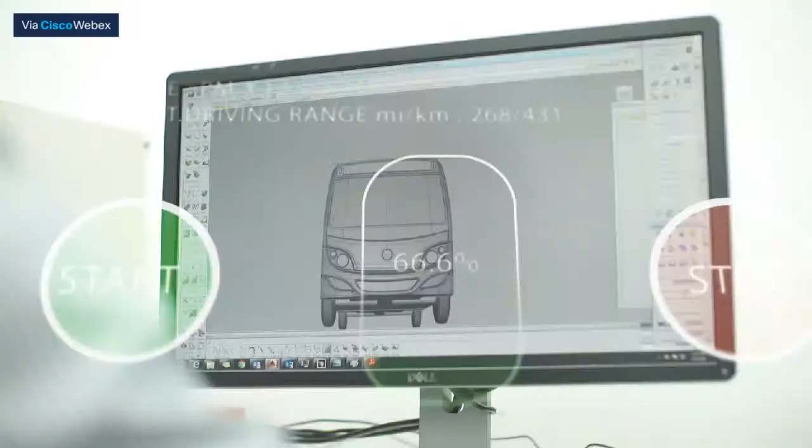We are working towards using cleaner energy sources to drive our vehicles. Our electric vehicle program is set to redefine the future of environment-friendly transportation.

Our greatest test, however, is a matter of national security. We are the largest supplier of logistics vehicles to the Indian Army. Our vehicles perform under the toughest conditions on our national borders.

Our engines not only help safeguard our nation, but also help power businesses. The power solutions we provide are amongst the most reliable in the market.

Our belief in partnership for growth has kept customers' progress at the heart of every solution we provide. To us, partnerships happen on many levels. Our driver training institutes have produced close to 1 million highly skilled drivers across the country.

In the remotest villages of India, we have revolutionized the way children are being educated. Through key collaborations and innovative teaching methods, we are empowering the children of our villages.

To us, mobility is more than just the business we are in. In our world, it signifies progress. It means enabling success to our customers, enhancing their lives. Mobility for us is everything in life.

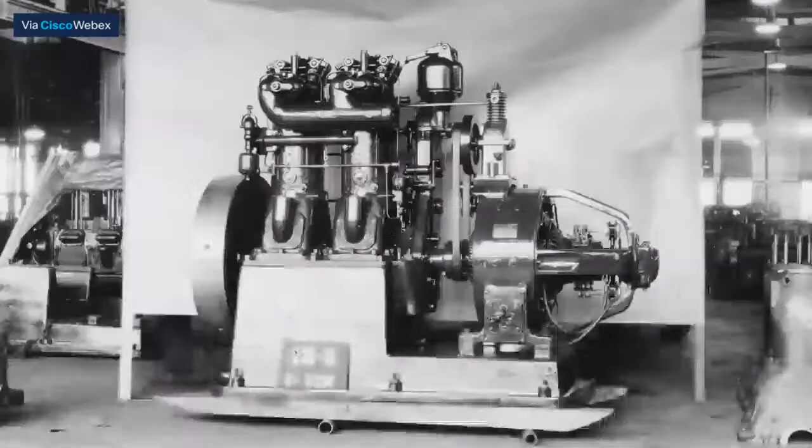We are Cummins. We create the power solutions people depend on. It's what we've done for more than 100 years. Sure, all that history makes us proud, but the future pulls us forward.

However good we are today, we know the best is yet to come. Our business is endlessly shaped by our customers. What they need defines us. And what they say makes us stronger. Who are they? Everybody.

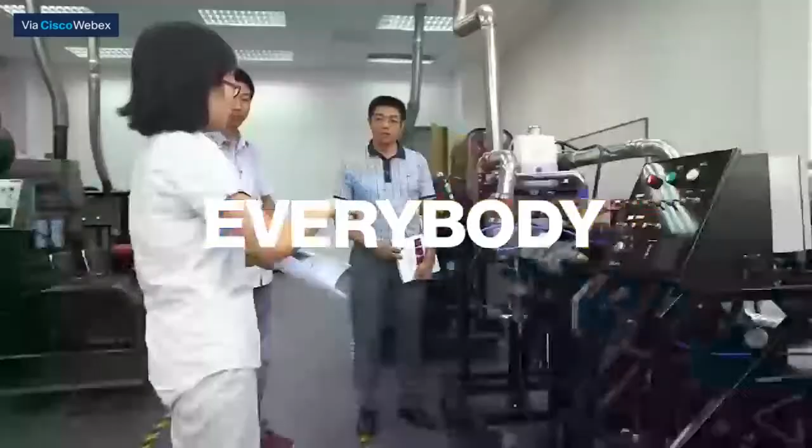But whether their challenges are personal or global, we do everything in our power to solve them. Because no matter where you're headed, we've got your back. And we're with you all the way.

And we never forget how our actions impact the people and the world around us. So whenever there are choices, we make sure we do the right thing.

This is what we do to power a more prosperous world. And that is never going to change. That's why we're always trusted, always innovating, always customer-driven, always responsible. For a world that's always on.

Welcome to the world of Tata Steel. A flagship company of the global business conglomerate, the Tata Group. Tata Steel is one of the world's most geographically diversified steel producers, with operations and commercial presence across the world.

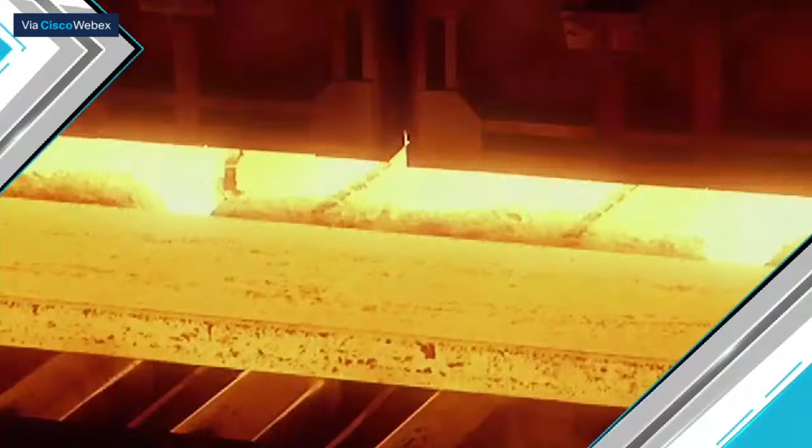The story began with the dream of one man, Jamsetji Nusserwanji Tata, a pioneer, a visionary, a man ahead of his times. He had his heart set on building a steel plant in India that would compare with the best globally.

His dream was brought to fruition by his son, Dorabji Tata, and thus was born Tata Iron and Steel in Jamshedpur in 1907. At the turn of the 21st century, fueled by its global aspirations, Tata Steel expanded its footprint

to Southeast Asia in Singapore and Thailand. Acquisition of Corus in Europe in 2007 placed it amongst the top global steel companies in the world.

In 2015, Tata Steel set up a state-of-the-art integrated steel plant at Kalinganagar, Odisha in India. The Phase 2 expansion of the Kalinganagar steel plant from 3 million TPA to 8 million TPA is currently underway.

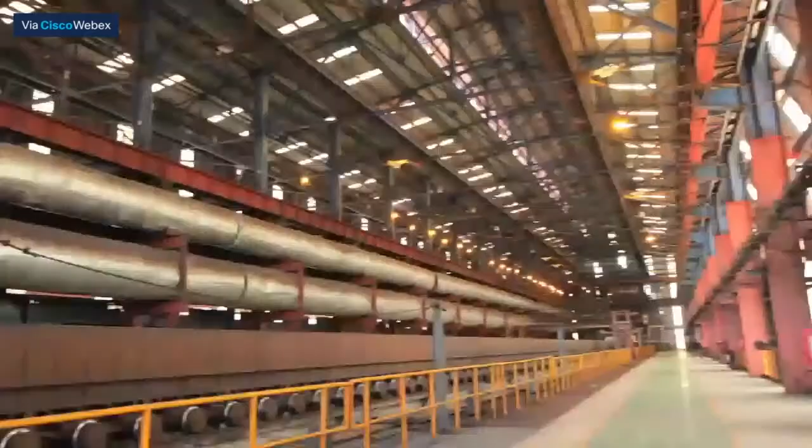The company is all set to pursue domestic growth with its acquisition of Bhushan Steel Limited and the steel business of Usha Martin. This forms part of the overall strategy to increase its India footprint, build capacity in long products, and enrich the product portfolio.

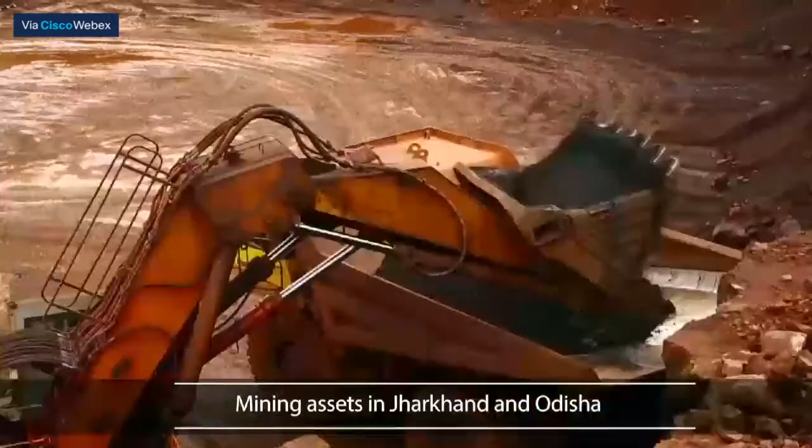Besides steel manufacturing facilities, the company has mining assets in the state of Jharkhand and Odisha in India. Tata Steel has evolved into a leading steel manufacturer, catering to diverse market segments.

In its trend-setting journey, spanning more than a century, Tata Steel has contributed immensely towards the well-being of the planet and people. Guided by its vision to be the global steel industry benchmark for value creation and corporate citizenship, Tata Steel is poised to lead the future.

At Bharat Forge Limited, we don't believe in pause buttons. 50 years ago, we hit play, and we haven't stopped since. We move, we go places, and we take our legacy with us.

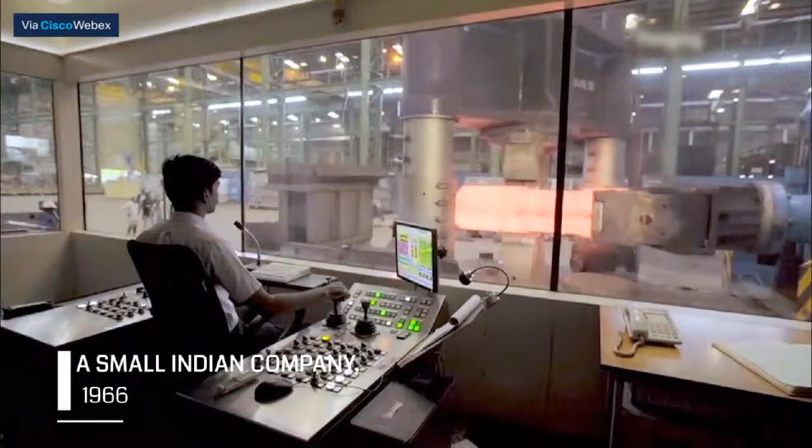We started small, but our dreams were big. And we chased them tirelessly with all our heart. That's what brought us to the top.

To the world's biggest names, and to people's lives. We're committed to partnering greatness, no matter where we go. From India to Germany, to France to Sweden, and now USA. We always go that extra mile and bring the best to wherever our clients are, and we never settle.

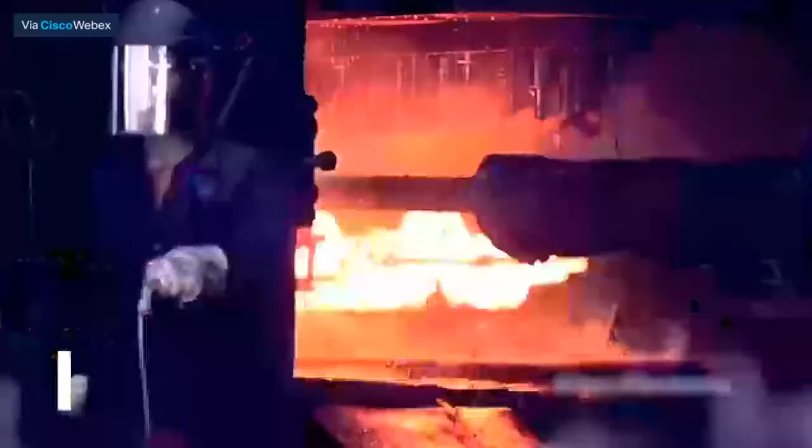Over 50 years, we have pioneered innovations across fields. Our expertise keeps sharpening. Our credits keep increasing, and our relationships, they only keep growing.

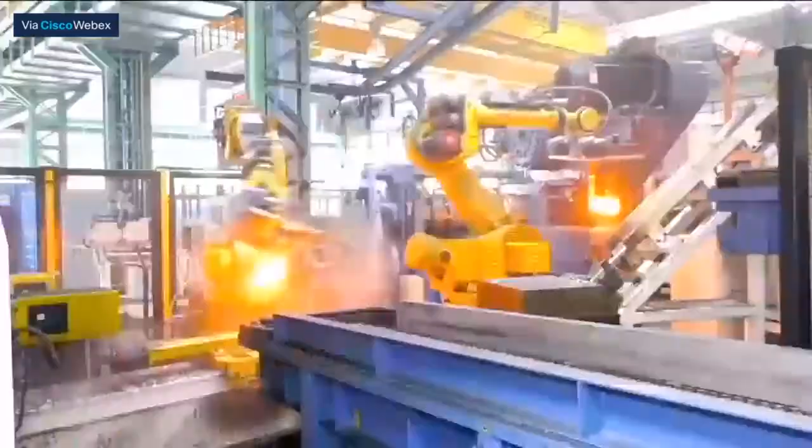We are fueled by our dreams, inspired by the next possibility. We nurture ideas, give them wings, make them soar. We seek to build a better, smarter, and brighter tomorrow. And we will, because that's just who we are: driven, caring, innovative, and unstoppable.

At Ashok Leyland, we've been in the business of mobility for close to 70 years. We are part of the Hinduja Group, a transnational conglomerate spread over 100 countries and 6 continents, with diversified business holdings across 10 verticals.

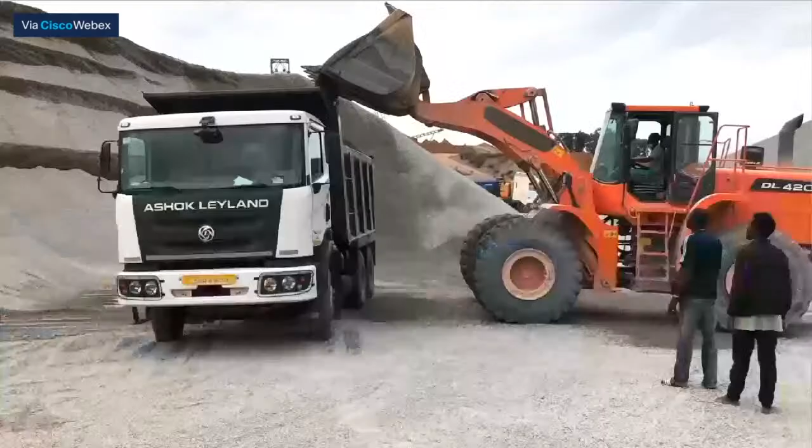Today, we are the second largest manufacturer of commercial vehicles in India. We are the third largest manufacturer of buses worldwide. We are present in more than 50 countries, besides being market leaders for buses in Sri Lanka and Bangladesh. We have a significant presence in the countries of the Gulf Cooperation Council and Africa, dominating in the bus and truck segments.

Our products reach out to over 70 million people. Yet every day, we strive to find new ways of enhancing the lives of the people around us.

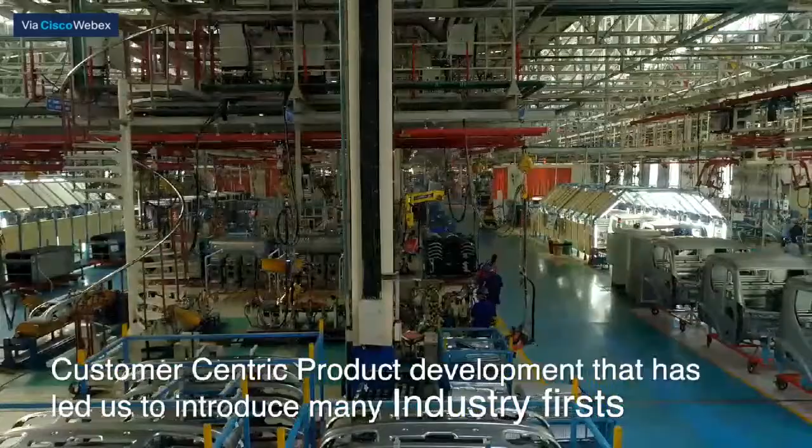We're constantly innovating for the future, helping redefine mobility, designing better products, and finding better ways to produce them. Our products are defined by their practicality and functionality. Every customer solution we provide is driven by thoughtful innovation.

With the introduction of BS6, Ashok Leyland has taken the proven IEGR technology up a notch to introduce the iGen 6 engine technology, which enhances engine performance and durability further. With lower diesel exhaust fluid (DEF) consumption and compact design, iGen 6 lowers the cost of operation, offers better fuel efficiency and low maintenance. The unique mid-NOx strategy ensures overall lower cost of ownership.

AVTR is a revolutionary, industry-first modular truck platform from Ashok Leyland that is powered by the iGen 6 technology. AVTR's incredibly diverse range of options lets you customize your truck based on your load, terrain, and application requirements, spread across the entire range from 18.5 to 55 tons. The AVTR range of trucks comes with multiple options of axle configuration, loading spans, cabins, suspension, and drivetrains on a single platform that offers you a whole new trucking experience.

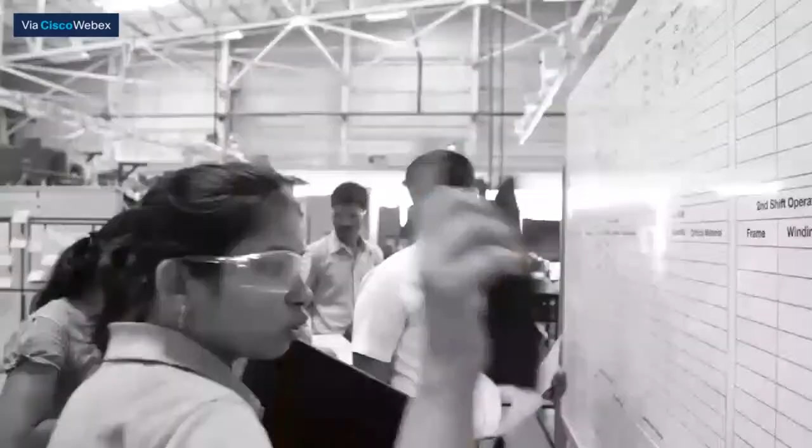Our business is endlessly shaped by our customers. What they need defines us, and what they say makes us stronger. Who are they? Everybody. But whether the challenges are personal or global, we do everything in our power to solve them. Because no matter where you're headed, we've got your back, and we're with you all the way.

And we never forget how our actions impact the people and the world around us. So whenever there are choices, we make sure we do the right thing. This is what we do to power a more prosperous world, and that is never going to change. That's why we're always trusted, always innovating, always customer-driven, always responsible, for a world that's always on.

Welcome to the world of Tata Steel, a flagship company of the global business conglomerate, the Tata Group. Tata Steel is one of the world's most geographically diversified steel producers, with operations and commercial presence across the world.

The story began with the dream of one man, Jamsetji Nusserwanji Tata, a pioneer, a visionary, a man ahead of his times. He had his heart set on building a steel plant in India that would compare with the best globally. His dream was brought to fruition by his son, Dorabji Tata, and thus was born Tata Iron and Steel in Jamshedpur in 1907. At the turn of the 21st century, fueled by its global aspirations, Tata Steel expanded its footprint

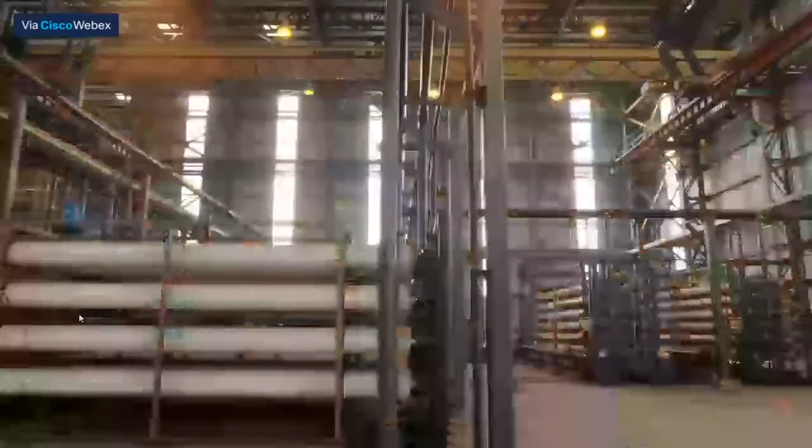The company is all set to pursue domestic growth with its acquisition of Bhushan Steel Limited and the steel business of Usha Martin. This forms part of the overall strategy to increase its India footprint, build capacity in long products, and enrich the product portfolio. Besides steel manufacturing facilities, the company has mining assets in the state of Jharkhand and Odisha in India.

Tata Steel has evolved into a leading steel manufacturer, catering to diverse market segments. In its trend-setting journey, spanning more than a century, Tata Steel has contributed immensely towards the well-being of the planet and people. Guided by its vision to be the global steel industry benchmark for value creation and corporate citizenship, Tata Steel is poised to lead the future.

At Bharat Forge Limited, we don't believe in pause buttons. 50 years ago, we hit play, and we haven't stopped since. We move, we go places, and we take our legacy with us.

We started small, but our dreams were big. And we chased them tirelessly with all our heart. That's what brought us to the top, to the world's biggest names, and to people's lives. We're committed to partnering greatness, no matter where we go.

We are fueled by our dreams, inspired by the next possibility. We nurture ideas, give them wings, make them soar. We seek to build a better, smarter, and brighter tomorrow, and we will. Because that's just who we are: driven, caring, innovative, and unstoppable.

At Ashok Leyland, we've been in the business of mobility for close to 70 years. We are a part of the Hinduja Group, a transnational conglomerate spread over 100 countries and 6 continents, with diversified business holdings across 10 verticals.

Today, we are the second largest manufacturer of commercial vehicles in India. We are the third largest manufacturer of buses worldwide. We are present in more than 50 countries, besides being market leaders for buses in Sri Lanka and Bangladesh. We have a significant presence in the countries of the Gulf Cooperation Council and Africa, dominating in the bus and truck segments.

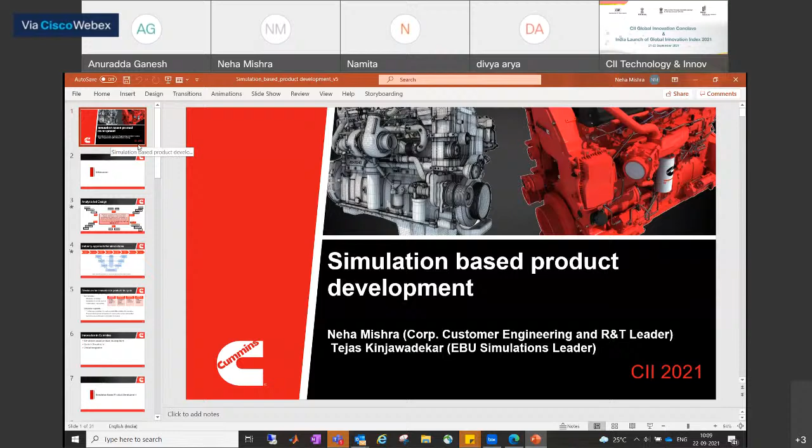With this, over to Neha and Tejas. Neha, I understand you're going to start first. Over to you, I really know that the audience are going to enjoy the talk. Thank you so much, over to you Neha. Kind words, thank you. Just to save the bandwidth, I'll be switching off my video. I've got some unstable internet, so just a disclaimer in the beginning. Neha, you'll need to speak a little slowly. Sure. Thank you. Please, someone can confirm if my screen is visible to all. Yes, yes it is, yes.

Good morning everyone. It's our extreme pleasure and we feel honored to actually deliver a talk on simulation-based product development. We would be talking about the journey which Cummins has taken from an analysis-led design towards a simulation-based product development, an innovative and creative approach so that we can save money, time, cost, and actually lead to products which are going to be not only performance-wise optimized, but also robust for the market.

So with that, I'll start with an introduction of the topic. What do we actually mean by analysis-led design or modeling and simulation in general? What you see on the screen is essentially a wiki definition of modeling and simulation. I'll read it for you. Modeling and simulation is the use of models - physical, mathematical, or otherwise logical representation of a system, entity, phenomenon, or process - as a basis for simulations, methods for implementing a model, either statically or over time, to develop data as a base for managerial or technical decision making.

I know it's a very complex jargon of words put together by Wiki, but it wanted to make it really very holistic to define what modeling and simulation is. If you look at it more carefully, it encompasses everything under the sun when it comes to taking decisions in product development. So when we look at modeling and simulation, there are typical questions which come to any kind of concept being introduced - the 5 W's and 1 H.

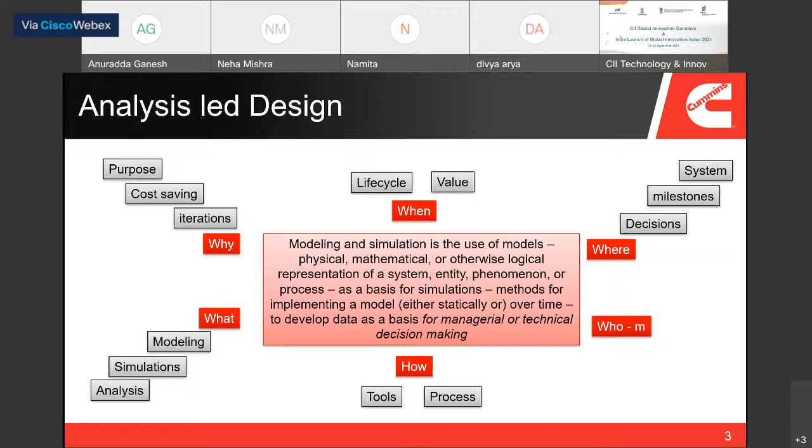If I look at it from an on-highway application of vehicles, you do a summer trial, you do a cold trial, you are looking at different altitudes, then there are many milestones. Can I do simulations much ahead in time so that you are ready for those kinds of actual testing?

And finally, who are the doers? Mostly the engineers who are aware of those tools and processes, and the stakeholders. Again, there is a trend which is coming in, and that's what Cummins is encouraging: the people who are going to use the data should be running these simulations. How can we make these tools more and more user-friendly and effective?

We need to gain confidence of our stakeholders at how close it is from the real time. And finally, in the product development cycle, it should also enable independent verification and validation. So this is, in a nutshell, mostly around modeling and simulation.

What is the industry approach for simulation? Any software or requirement change triggers a unit testing. You start implementing that requirement. Once you have implemented it, you start trying to test it in a model-in-loop simulation.

Eventually, you take it to a processor-in-loop simulation, trying to evaluate whether in the realistic scenario we are going to have impact on the time responses. Is it having enough memory, and so on and so forth? It leads to hardware-in-loop simulations. Then it goes to vehicle testing, certification, and eventually the life cycle assessment.

So if I look at it from the entire product life cycle, from the concept or the requirements all the way to the sustainability of that component or product into the field, system simulation has a role to play everywhere. So what you now see on screen is essentially the V diagram of modeling and simulation.

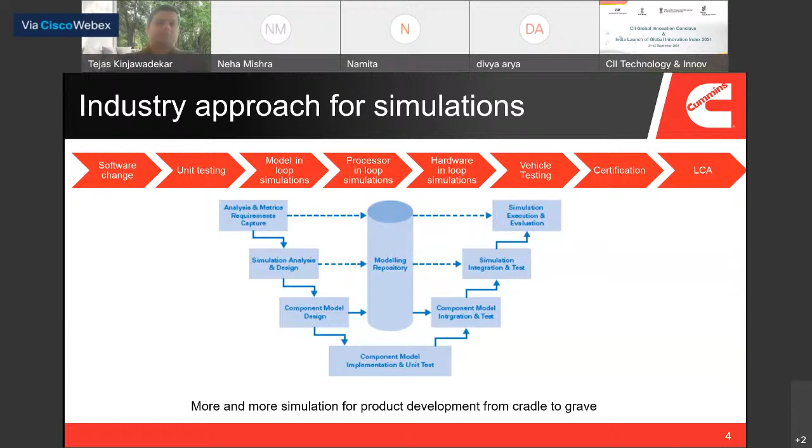So these model repositories become a kind of big database from where we can take decisions fairly quickly without waiting for a duplication of the issue onto the vehicle. So that's the approach today: more and more simulation for product development, from cradle to grave.

And that's the journey which Cummins is taking today, from an analysis-led design, to simulation for innovation in the product life cycle. Simulations essentially enable a lot of innovation right in the technology exploration area, when you're evaluating concepts, when you do not have the liberty to actually cut metal, because you're trying to make sure whether this concept is going to add value and be a feasible product by the end of the day. So that's the time simulation plays a key role in the technology exploration phase of a product life cycle.

You actually go into product innovation when the new product is getting developed. So you have evaluated a concept, you have fairly great confidence on that concept, and now you're trying to build the actual product. And that's where a lot of innovation comes in when you're trying to optimize the performance. You may not be able to do it if you're doing hardware iterations.

All the iterations, all the combinations can be taken care of in the simulation environment. And another concept coming up in the industry nowadays is that we don't only need performance which is optimal, we are also looking for a robust performance.

If you look at it from an on-highway application, the truck which is going to be bought in India is not going to be restricted to one location. It's going to go from high altitudes in Leh Ladakh all the way to sea level in Chennai, and it needs to take care of all the variations in environment and usage factor. So to ensure our products are robust for all these conditions, we obviously cannot test them all, but we can simulate those situations and give them a robust product.

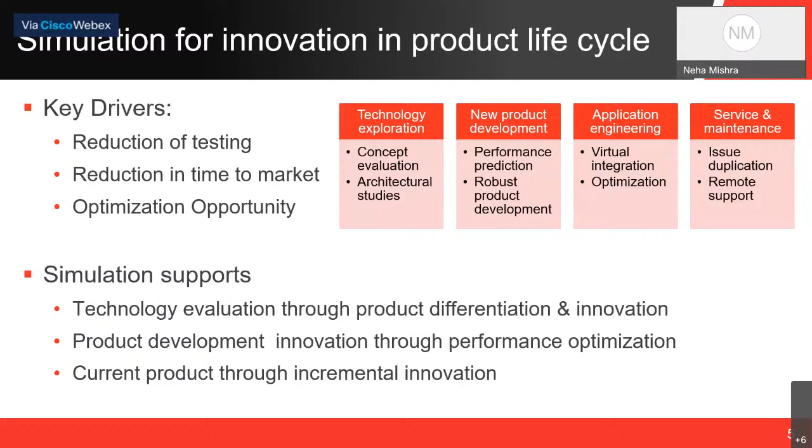So in a nutshell, what I'm trying to say is: technology evaluation through product differentiation innovation at the beginning of the product life cycle, product development, optimization of performance and robustness, and definitely incremental innovation through current product support.

This is how we have structured today's discussion. We are trying to talk about innovation in Cummins through ALD, through modeling and simulation, through simulation-based product development. So Tejas, my colleague, is going to talk about the approach or process we have started adopting in Cummins, which we are calling simulation-based product development.

Post the introduction of the concept, I'll talk about system simulations, how we actually optimize component performance to ensure the end customer's requirements are being met. And finally, Tejas will come back and talk about virtual integration, how we integrate our components and products into the end application virtually to make sure the product is robust and performing optimally. So with that, I'll ask Tejas to take over a few slides.

Sure, thank you Neha. Thanks for the introduction, and good morning everyone. So Neha gave us a good background of where simulations fit into the different stages of product development. What I'll focus on next is this initiative that we currently have, which is a big part of engineering focus right now in Cummins, called simulations-based product development.

So I'll start off with what exactly is simulations-based product development, or SBPD, and what makes it different from what we have been doing in the analysis-led design space. Like many companies, Cummins has also been doing analysis-led design for a couple of decades now. A lot of the focus in analysis-led design was at the component level, so that we analyze designs through FEA methods and CFD simulations, to have confidence in the design before we build prototypes or procure hardware for it. That was the focus of analysis-led design.

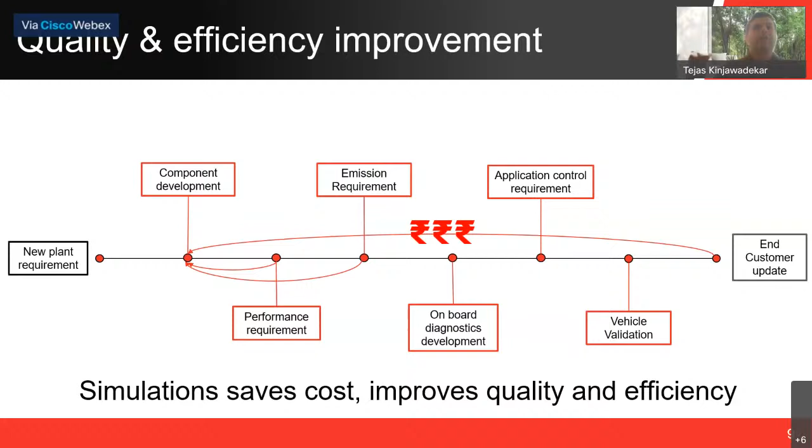If you treat this as a linear process, and something causes rework towards the right of this cycle, the further right you are, the harder and more costly it is to do any rework. What simulations get you is shorter closed loops, where as I'm developing my component, I can assess if my performance requirements are met, if my emissions requirements are met, and if I'm meeting my customer defined requirements while developing the component. So it helps save cost and deliver a better quality product more efficiently.

Going back to my earlier comment on culture change, typically you look at simulations with two lenses. One is the lens of accuracy: if I have a real physical system, how close are my simulations predicting that real system's performance? The second lens, which is not used as effectively, is the repeatability of the tool. With simulations, you get almost perfect repeatability, because it's a mathematical or physics-based model, which if you give the same inputs, should give the same outputs every time. So it's a highly repeatable setup.

So if you look at the different options listed here, starting from field population. I'll pick an on-highway example. So you're testing a truck out in the field, or testing multiple vehicles in the field. There are so many different noise factors that come in. How is the driver driving the truck? What kind of operating conditions are you testing on? What are ambient conditions, traffic, road, all of those things come into play.

So when you pick a data set from your field population, it's tough to figure out whether it's truly representative of your end population, or you're picking up a data set from one of the tail ends of your bell curve. This becomes especially harder when you're trying to assess if whatever improvements you have done, be it a hardware change or a calibration change, those improvements are typically incremental. You'll have multiple features which add up to, let's say, 5%, 10% fuel economy, but the individual features contribute only portions of it. Now if your variation in testing is so high that you cannot resolve those differences, then there's a drive to tighten the variation.

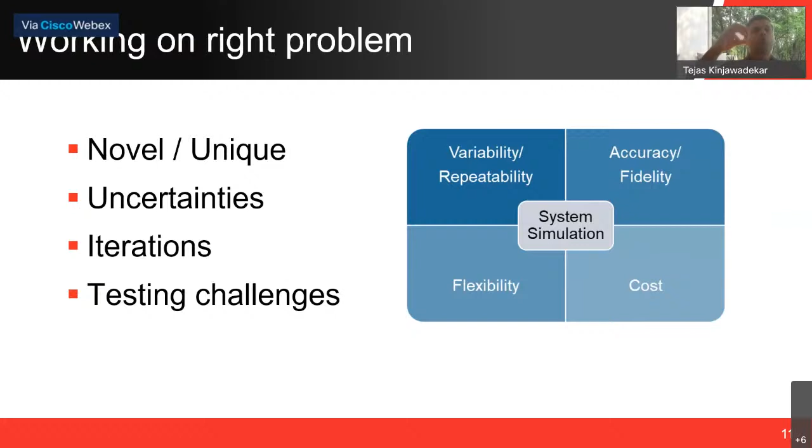So what we'll next go into is this system simulations area, which Neha will cover. Thanks, Tejas. So Tejas did talk about the system simulation-based product development, and that it triggers to a system simulation, because whatever we develop has to go to an end customer who's going to use it. So Cummins develops engines, after-treatments, filtrations, and many other components, which actually go into different applications. And we are looking at an innovative approach of can we simulate those and come up with better products.

So I'll start with two examples. The first one, our favorite, where our engines majority of the time goes in India, is the truck application. So for an on-highway or industrial application, these are the two places where Cummins engines go.

So what do we do the first thing when we are actually putting together an on-highway application? We like to see how the architecture would look like. So if it's a truck application, we are looking at it from a drivetrain perspective, because there's a system level requirement of drivability, of performance, which is going to be driven by fuel economy.

Now, all the on-highway or off-highway applications are driven by emissions. So all of these will guide how I should define and develop my drivetrain so that it meets all of these systemic requirements. And if I need to evaluate what all are the different options, one heuristic way is going and actually building those different drivetrains and comparing and running a field test.

Instead, we now have tools which can actually do these architecture studies, and they are all available tools in the market, like Autonomie, Amesim Hybrid Optimization tool, or Simscape, and so on and so forth. Excavators or all the off-highway applications are even more important for doing these architectural studies, because their hydraulic and pneumatic circuitries also need optimization.

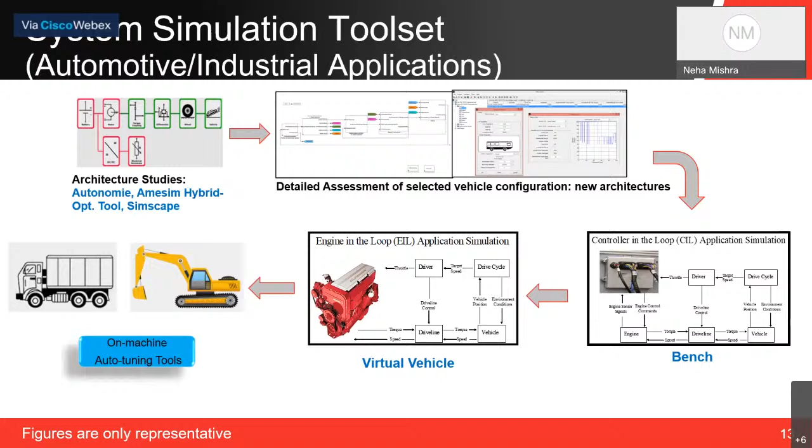Another example of where Cummins engines go in is gensets. So we have something called basic simulation. When you actually start having a controller, what you normally do as testing is have simulated standard inputs given to those controllers, and then you check against the standard outputs which are expected out of it. It's a kind of open loop test which is typically done in a basic simulation heuristically for any genset.

And then once that's done, we normally go to a genset, which is actually hardware, and then optimize the testing. These gensets not only go for - they are in a wide range of applications where they stay. They can be on a local application, a residential application, or they can actually be in your data centers. And all of them will be seeing a different kind of duty cycle.

So every time a genset goes for a specific application, the control engineers also have to go there and actually tune it for that specific application. So that's the kind of work culture that existed earlier.

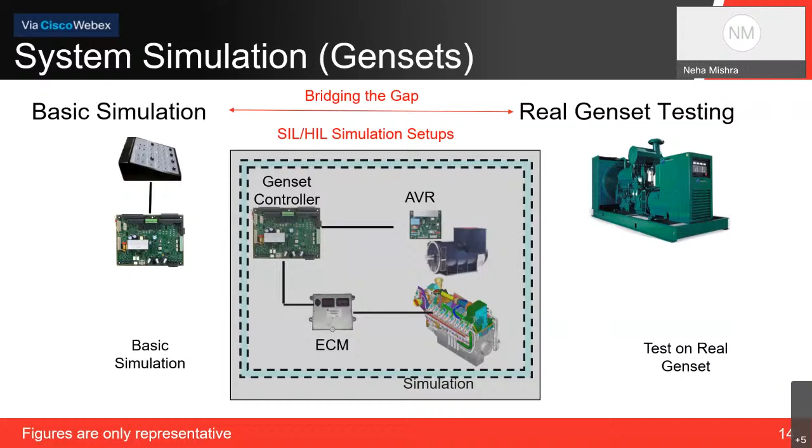So with that, two examples, I would now go a little deeper into what do we mean by system simulation, and how we build together all these components as a system simulation setup.

So if I look at it from Cummins context, what are the different components which we have? We have turbo, we have cylinders, bowl, injectors, catalyst, if it's an after treatment. So all of these become my components. I need to actually create models for these components.

Where are these models being created? In a very historical way, as CFD simulations, FEA domain, or dynamics. So these are the places where all these components are modeled today.

They become a subsystem, because then you have an engine subsystem, which will have an air handling system, a fuel handling system, and all of them put together will actually contribute and make it an engine subsystem. We'll have an after treatment subsystem, controller subsystem, because all of these individual components would be controlled by certain signals, and all of them put together will now become my integrated controller.

And if I look at it in a modeling lens, vehicle dynamics is also a subsystem, because I'm going to integrate my vehicle dynamics or my drivetrains into this entire gamut of things and make it a subsystem.

Now, the moment we start putting together our subsystem models, it has to move out of a finite element domain and become 1D or 0D models. The reason being, it has to run at real time or faster than real time to set up more DOEs around it. So the tools typically used for subsystem modeling are mostly GT Power for engine, AVL Boost, others for after treatment. These are all 0D and 1D models.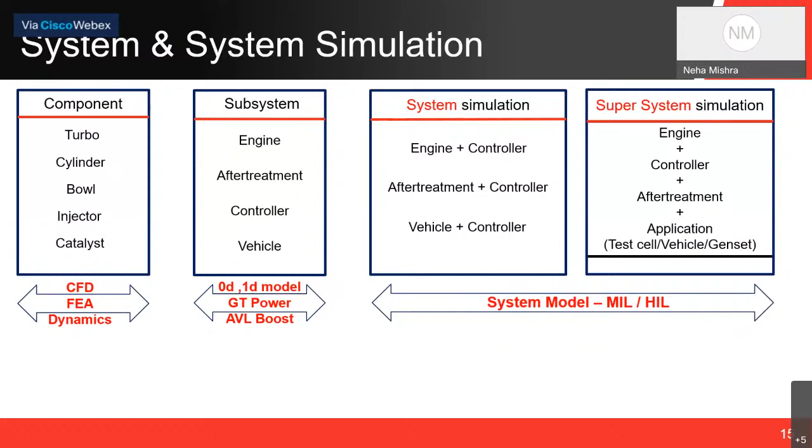And all of these models are typically called model in loop, depending on if it's purely a simulation environment, or hardware in loop, because you start putting some hardware in these loops, mostly from controls side, ECMs, and certain sensors and actuators.

So again, to understand a little more, what is my model development cost when I move from a component to a super system? Why is Cummins actually investing into a super system simulation when there is already component models existing? There is a model development cost, which is lower when you're doing it at a component side, but it starts increasing from a super system size.

But the impact you have from the optimized performance is humongous. The test coverage range, that's where the advantage comes in. If you are looking at a systemic performance, or our stakeholders are looking at systemic performance of emissions and fuel economy, they may not be able to make that out from a component optimization done at a turbo level. The turbo might be optimized, but we do not know the impact of a turbo change all the way up to fuel economy or emissions.

So there is a narrow coverage of test ranges when we start from component, and there's a huge coverage when it comes from a super system level, more relevant to our end customers. Model maturity wise, the component models are more detailed because they are done at a very small scale for a smaller component. As we abstract out the fidelity, it goes from high fidelity to low fidelity at a super system level, because there you're looking at it at system level. It is mostly guided by the computational power it requires and the time it takes for simulations. So this is how we actually quantify our systems and system simulations.

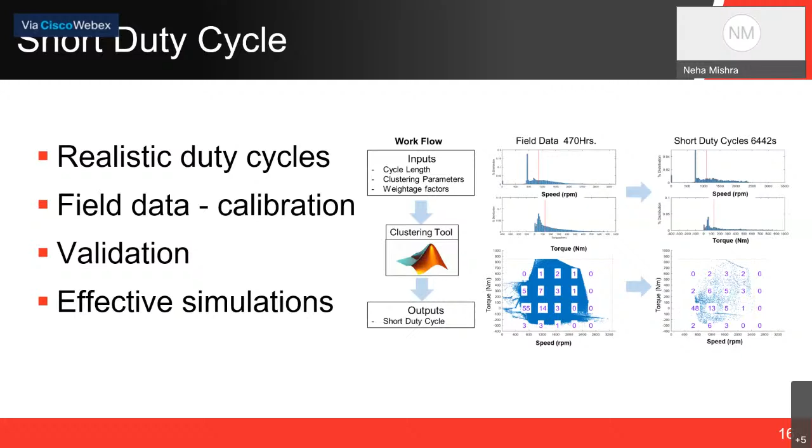You've been hearing us talk a lot about robustness. That's another area becoming more and more popular from our end customers' requirements perspective. They would be looking for an optimized performance engine that takes care of all the variability possible in our country, like I talked earlier, from an altitude point of view or from traffic areas, conditions, and the duty cycles it's subjected to.

The same engine can actually go into a marine application, and it also can go into a genset application. There would be very different requirements when it comes to vibration and noise when the same engine goes into different applications. So how do I actually make it a robust product? We have come up with a norm, not something new from the industry point of view. We have used the same Six Sigma approach, defining what is my key performance indicator. We started looking at the parameter diagram for the unit under test and see what's the desirable and undesirable outcome, and do a one-factor-at-a-time kind of DOE for the control and noise factors.

The reason why we do it is then we identify what are my critical noise factors, what are my sensitive control factors, and then we optimize the control factors and try to see the sensitive noise factors run the worst case scenarios.

Once we have run the worst case scenarios, we understand whether the current state which my product is at can handle the worst case. If yes, then we run Monte Carlo scenarios. If not, then we have to do something to update our models.

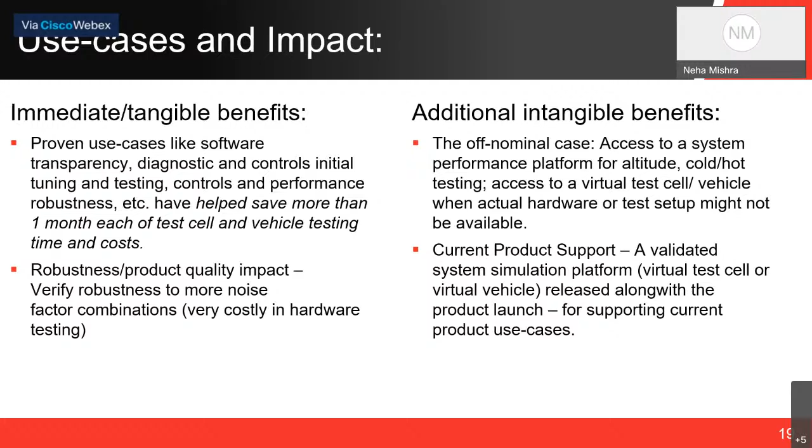And current product support - this is intangible since it's a new concept. A lot of products are already in the field, and there's a cultural shift, as Tejas was talking about. People say it's been working, so why do I need to model it? But when you see something failing, you can come back and make a change using these models more effectively. So that's something we're trying to take note of, use, and eventually show that even current product support is going to have a huge benefit using these methodologies.

Another example - Cummins is also venturing into alternate power solutions, such as electric transit bus evaluation of the drivetrain. So not only are we talking about conventional diesel drivetrains, we're also talking about electrified drivetrains and how we can select simulations for them.

We have very good simulation models of driver behavior, so you can see whether you have an aggressive driver or a calm, composed driver, and so on. We run all of these simulations for powertrain sizing scenarios or route-specific simulations.

This is one of my last slides on the system simulation topic. We are also moving towards realistic simulation. So what next in the modeling and simulation domain? We did the performance, we did the robustness pieces of things, and we are now reaping the benefits of all of these.

But the next thing is there will be more and more advanced control features coming onto vehicles. There are advanced sensors being installed to enable those advanced control features across different applications. Many different vehicle and powertrain systems will come up, along with a lot of safety controllers and safety requirements on applications. So how are we going to integrate all these different types of controllers and simulate them? Realistic simulation becomes a very key thing in the modeling and simulation domain.

That's what we're working on now - trying to integrate our detailed high fidelity models with realistic simulation: simulating traffic situations, traffic congestion, speed limits, vehicle dynamics, road conditions, and all of those factors. If you remember Tejas's plot on variability, we started with pure simulation, then we were able to do a virtual dyno and a virtual vehicle, but the variability of road and traffic congestion wasn't there. Once this capability is developed, we'll again start incorporating those kinds of uncertainties into our simulations.

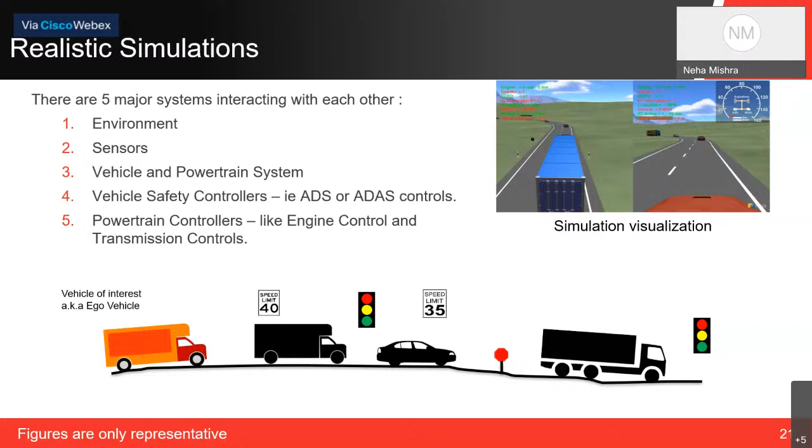So finally, the takeaway from a system simulation perspective: optimal and robust performance is a need. Simulation enables innovation for right-first-time results and reduces time to market. The other thing which leads us to the next topic is virtual integration - once this is done, how well are my components installed onto the end application. Tejas is going to talk us through the virtual integration side.

Thanks, Neha. So we're now heading into the last leg of our presentation today.

Cummins being a power solutions provider, it's very important for us to make the integration in the end application as seamless and efficient as we can, and engage with our OEM partners to deliver a product optimized for their use case or their own customers.

With that thought, there is a team here in India called the Virtual Integration Center, which was developed specifically on how we use simulation capabilities to better integrate Cummins products. It's a multi-domain simulations team focused on machine integration.

What types of analysis we do, we'll cover in the upcoming slides. When we talk about simulations-based product development, there are different strategic elements to it - what kind of tools you use, but also what kind of org structures you need to effectively cater to the simulation requirements.

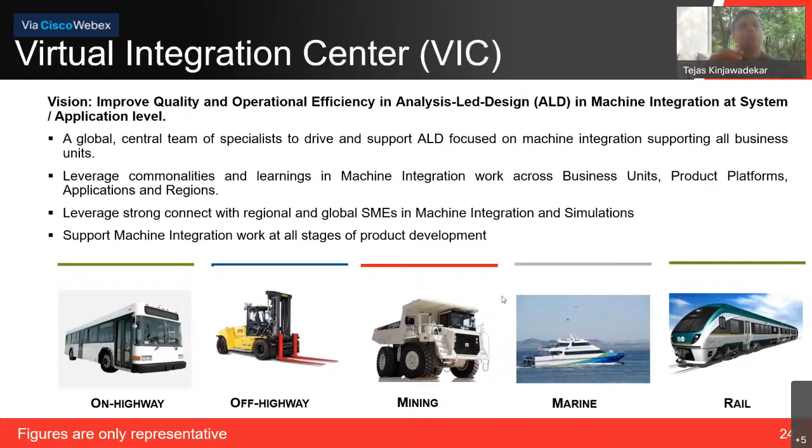Next we'll go into what types of simulations are used. Again, the focus is machine integration - so the Cummins product and how it gets integrated into the end application. We're doing a lot of machine level CFD simulations, or computational fluid dynamic simulations.

A recent focus area has been external aerodynamics, where we predict drag coefficients of vehicles and then make recommendations on how their drag can be reduced, because that directly translates to fuel savings.

Neha talked about advanced controls features. As markets go into platooning type applications, there are trade-offs of the distance between two trucks that impacts the cooling system performance. So how does external aerodynamics interact with cooling systems, and how does that interact with the distance between vehicles? We are developing simulation capabilities to understand all of that.

Another use case is multi-phase simulations, which is typically hard to do. But we have found good use cases - for instance, if we have sensors exposed to the ambient, or protected but still having water ingress that can damage them. We use our simulation tools to predict the potential for water ingress and design to protect against that.

Or going back to cooling system performance, how do you ensure that whatever coolant you're filling gets uniformly distributed in all the cooling channels and jackets so that you end up with effective cooling performance.

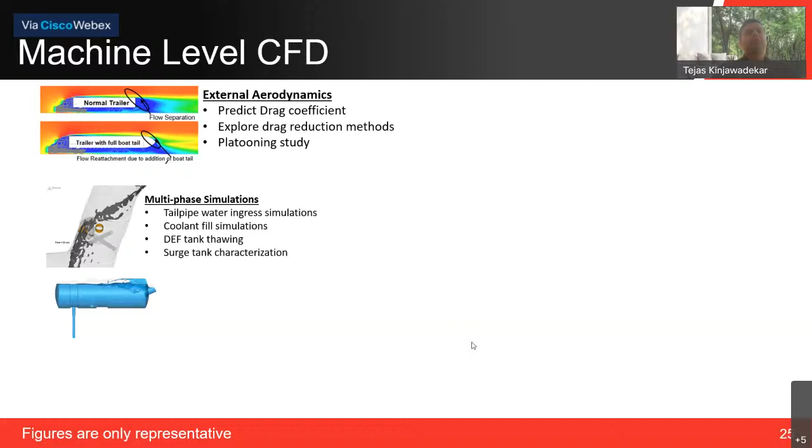Diesel exhaust fluid - going back to the number of applications and regions our products go into, in very cold ambient conditions there is a need to thaw your diesel exhaust fluid. We are trying to see if simulation tools can help us predict that.

The next piece is solid temperature prediction. From an integration standpoint, you put an engine on a commercial truck - the truck and engine have each been designed, but once integrated there could be scenarios where you have hot air recirculating within the engine compartment. How do you anticipate that? What's the right area to provide heat shields, where do you need outlets for hot air to pass, and where do you see a risk of components overheating? That's what we do in solid temperature prediction.

This next one is pretty standard - pressure drop studies using CFD tools. The earlier you do it, the more effective integration you'll have, because all of your plumbing or piping routing depends on this. So you need to consider vehicle packaging while also meeting your powertrain requirements.

Lastly, what we call underhood simulations - basically studying the airflow under the hood, through the engine or powertrain compartment. This has many applications. First is whether the machine cooling system is designed properly to meet the heat rejection requirements of your powertrain. That's the obvious goal, but it has added benefits too, where you can get better fuel economy if you size the fan correctly.

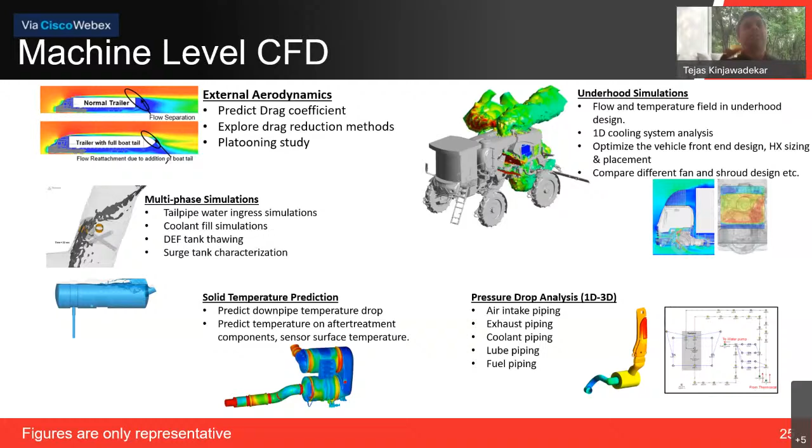You can reduce the noise levels of your powertrain if you do this integration well. So that's a quick snapshot of what we do in CFD.

Just as we do driveline torsional vibrations, we also do mounting system analysis - what are the right types of isolators or mounts that need to be selected, where should they be positioned, and how can that be optimized. That's what we do in mounting system analysis.

Next would be what we call front-end accessory drive - essentially your belt drive that drives all the different accessories. We often have changes from our OEM partners, who want to use a bigger alternator, or their lube pump or hydraulic pump is changing. So what we try to do is have a validated model for a base installation, and when any of these changes happen, we use our models to see if we need additional tensioners, or if there's a risk of belt slippage, those kinds of things.

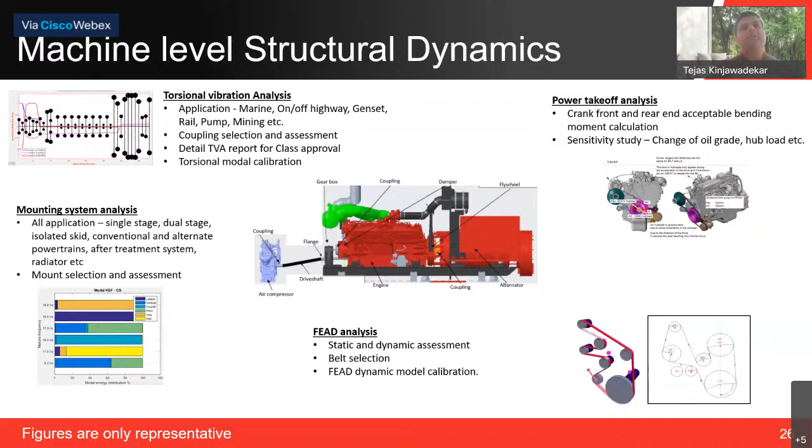The next piece is still in the structural space, but now we're talking about detailed 3D FEA models. If we take the example of an engine, it will go into different applications and be coupled to different types of transmissions, so the design has to be such that it can integrate with all of those transmissions. This is what we call a full powertrain structural analysis.

The next piece is, we often have requirements from smaller OEMs or different regions where they require very specific tailored installations, and there we would help them with the full installation - everything related to how you lift the entire genset canopy, how you transport your powertrain, how resistant it will be to seismic loading, and so on.

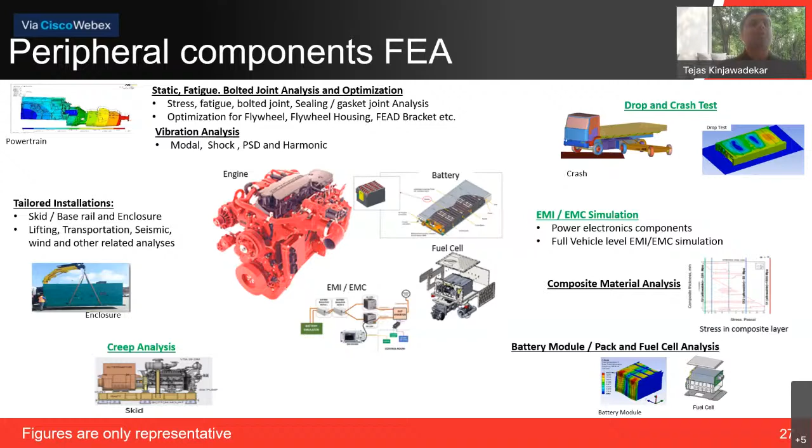Again, because we are dealing with high voltage systems, it's important to look at electromagnetic interference and compliance at a system level, because that impacts how you route your high voltage cabling, where you place your power electronics devices, and so on. With these new technologies, we are now working with different materials as well - how do you analyze composite materials used in battery packs and so on.

What we also do in the design and packaging space is look at the CG location, how the mounts need to be positioned based on that, and fit checks. One recent capability we've developed, very useful for prototyping or repowering projects, is that if you start off with a scan of the installation or a scan of certain components, we can create accurate models based on that.

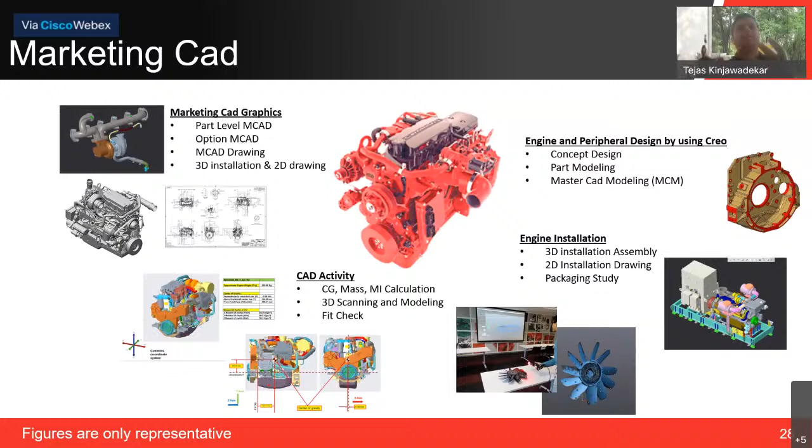So I think one common theme in the design space is also automation. There are ways to parameterize the space claim that you have across different applications and see how you can commonize, be it battery modules or other powertrain elements related to that. So a lot of work is happening in this space as well.

So it's truly a company-wide effort, and we are engaging with every function in engineering to embrace simulations-based product development. And I think the benefits are huge. It will help us innovate faster as we work with these new technologies, deliver more robust designs for our customers, and definitely help reduce our cycle times or development times. What resonates with me personally a lot is the environmental impact as well. Every time we help avoid a hardware test, we are burning less fuel. Every time we build a more robust product, we are extending the in-use life of that product, so there's less material wastage at the end of it. So huge benefits to be had, and we are truly engaged on moving to simulations-based product development.

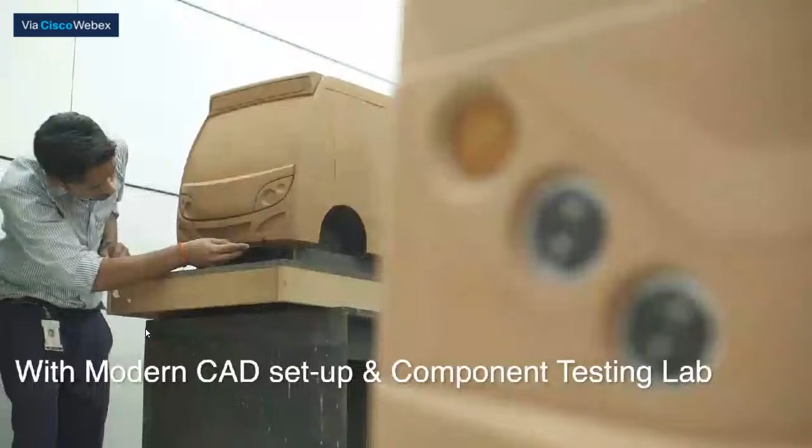Our products reach out to over 70 million people. Yet every day, we strive to find new ways of enhancing the lives of the people around us. We're constantly innovating for the future, helping redefine mobility, designing better products, and finding better ways to produce them. Our products are defined by their practicality and functionality. Every customer solution we provide is driven by thoughtful innovation.

With the introduction of BS6, Ashok Leyland has taken the proven IEGR technology up a notch to introduce the iGen 6 engine technology, which enhances engine performance and durability further. With lower diesel exhaust fluid (DEF) consumption and compact design, iGen 6 lowers the cost of operation, offers better fuel efficiency and low maintenance. The unique mid-NOx strategy ensures overall lower cost of ownership.

AVTR is a revolutionary, industry-first modular truck platform from Ashok Leyland powered by the iGen 6 technology. AVTR's incredibly diverse range of options lets you customize your truck based on your load, terrain, and application requirements, spread across the entire range from 18.5 to 55 tons. The AVTR range of trucks comes with multiple options of axle configuration, loading spans, cabins, suspension, and drivetrains on a single platform that offers you a whole new trucking experience.

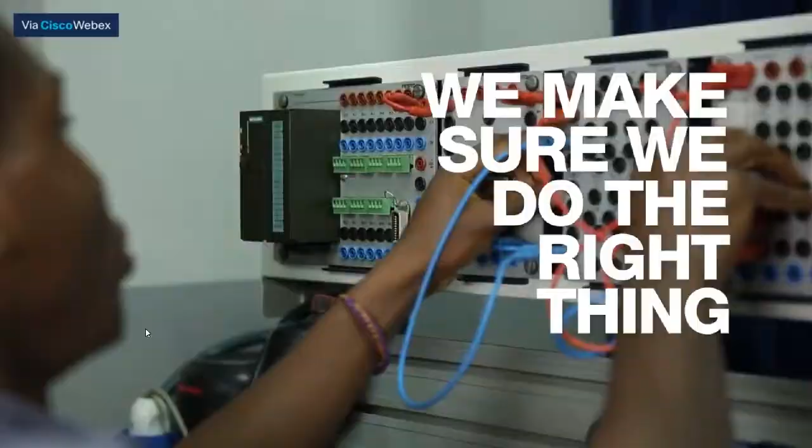And we never forget how our actions impact the people and the world around us. So whenever there are choices, we make sure we do the right thing. This is what we do to power a more prosperous world.

And that is never going to change. That's why we're always trusted, always innovating, always customer-driven, always responsible. For a world that's always on.

Welcome to the world of Tata Steel, a flagship company of the global business conglomerate, the Tata Group. Tata Steel is one of the world's most geographically diversified steel producers, with operations and commercial presence across the world.

The story began with the dream of one man, Jamsetji Nusserwanji Tata, a pioneer, a visionary, a man ahead of his times. He had his heart set on building a steel plant in India that would compare with the best globally. His dream was brought to fruition by his son, Dorabji Tata, and thus was born Tata Iron and Steel in Jamshedpur in 1907.

At the turn of the 21st century, fueled by its global aspirations, Tata Steel expanded its footprint to Southeast Asia, in Singapore and Thailand. Acquisition of Corus in Europe in 2007 placed it amongst the top global steel companies in the world.

Besides steel manufacturing facilities, the company has mining assets in the state of Jharkhand and Odisha in India. Tata Steel has evolved into a leading steel manufacturer, catering to diverse market segments.

In its trend-setting journey, spanning more than a century, Tata Steel has contributed immensely towards the well-being of the planet and people. Guided by its vision to be the global steel industry benchmark for value creation and corporate citizenship, Tata Steel is poised to lead the future.

At Bharat Forge Limited, we don't believe in pause buttons. 50 years ago, we hit play, and we haven't stopped since. We move, we go places, and we take our legacy with us.

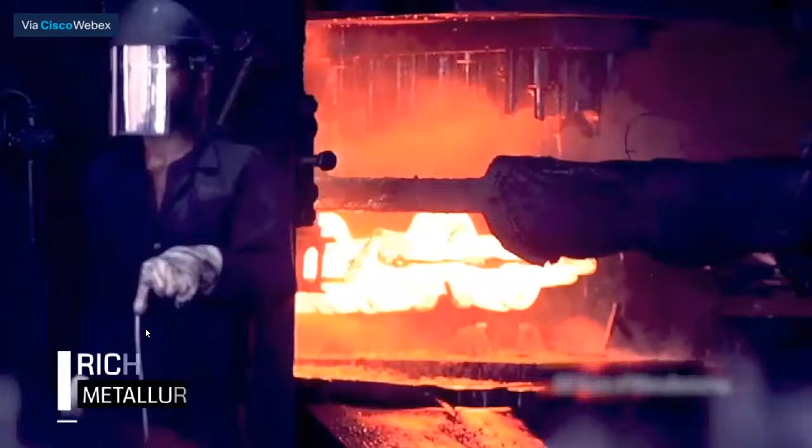And we never settle. Over 50 years, we have pioneered innovations across fields. Our expertise keeps sharpening. Our credits keep increasing. And our relationships, they only keep growing.

We are fueled by our dreams. Inspired by the next possibility. We nurture ideas, give them wings, make them soar. We seek to build a better, smarter, and brighter tomorrow. And we will.

Because that's just who we are. Driven, caring, innovative, and unstoppable.

At Ashok Leyland, we've been in the business of mobility for close to 70 years. We are part of the Hinduja Group, a transnational conglomerate spread over 100 countries and 6 continents, with diversified business holdings across 10 verticals.

Today, we are the second largest manufacturer of commercial vehicles in India. We are the third largest manufacturer of buses worldwide. We are present in more than 50 countries, besides being market leaders for buses in Sri Lanka and Bangladesh. We have a significant presence in the countries of the Gulf Cooperation Council and Africa, dominating in the bus and truck segments.

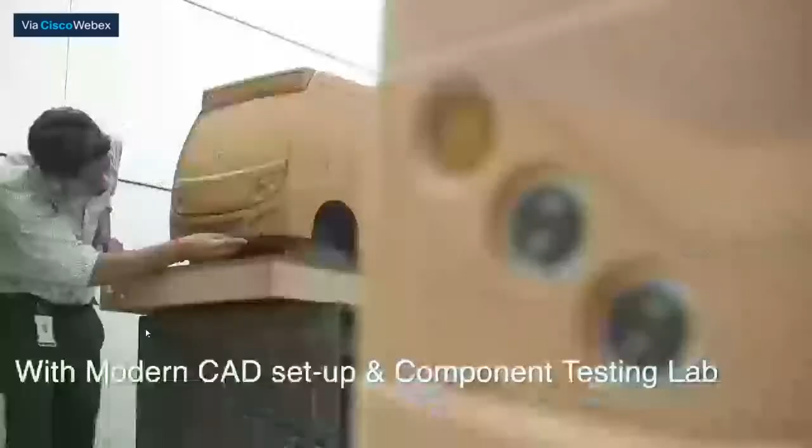We're constantly innovating for the future, helping redefine mobility, designing better products, and finding better ways to produce them. Our products are defined by their practicality and functionality. Every customer solution we provide is driven by thoughtful innovation.

With the introduction of BS6, Ashok Leyland has taken the proven IEGR technology up a notch to introduce the iGen 6 engine technology, which enhances the engine performance and durability further. With lower diesel exhaust fluid (DEF) consumption and compact design, iGen 6 lowers the cost of operation, offers better fuel efficiency and low maintenance. The unique mid-NOx strategy ensures overall lower cost of ownership.

AVTR is a revolutionary, industry-first modular truck platform from Ashok Leyland that is powered by the iGen 6 technology. AVTR's incredibly diverse range of options lets you customize your truck based on your load, terrain, and application requirements, spread across the entire range from 18.5 to 55 tons.

The AVTR range of trucks comes with multiple options of axle configuration, loading spans, cabins, suspension, and drivetrains on a single platform that offers you a whole new trucking experience.

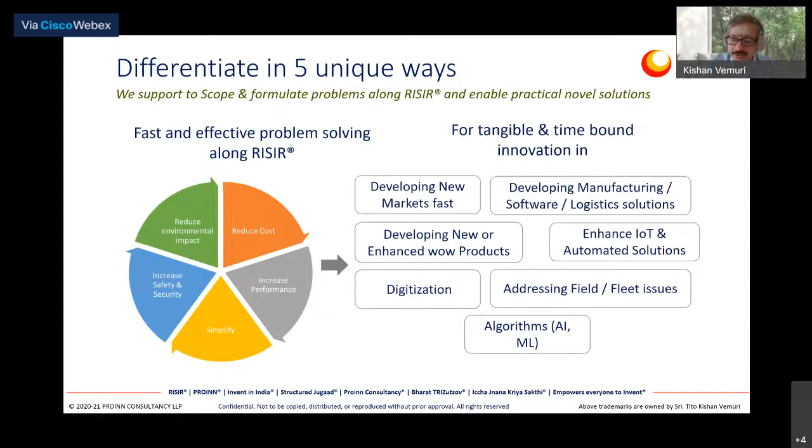What I've seen in my experience in the last 15 years is we can apply this learning channelized to different outcomes, be it new technology, new products, enhanced products, digital products, or even getting into new markets. To summarize this entire thing, this methodology of TRIZ is quite fascinating.

It's called, if I were to put it in a word, the best smart moves of all the innovators around the world, put in one place - that's where this methodology comes from. It's a methodology derived from patents, the best database available for novelty.

The father of TRIZ is Genrich Altshuller. When he looked at patents, he found that problems and solutions are being repeated across industries, which means we don't need to reinvent the wheel to solve a problem. Technology leadership comes only when you have a culture of innovation.

What we do is we make innovation a sport and make people play it and win. Very critically, people think many times it's impossible to solve problems. But the most impossible problems are often nothing but two conflicting requirements, and if we can come up with a win-win solution, that's where we can give a powerful solution that many times people think is impossible.

In the context of the pandemic, it's very critical that people develop more products in a given time. One of the biggest challenges many corporations face is the time they take to innovate, because many times people use known methods of trial and error, which makes the entire process quite long. Unless we groom our people from engineers to innovators, it will still be tough. You groom, you empower your people, and then you can demand things from them.

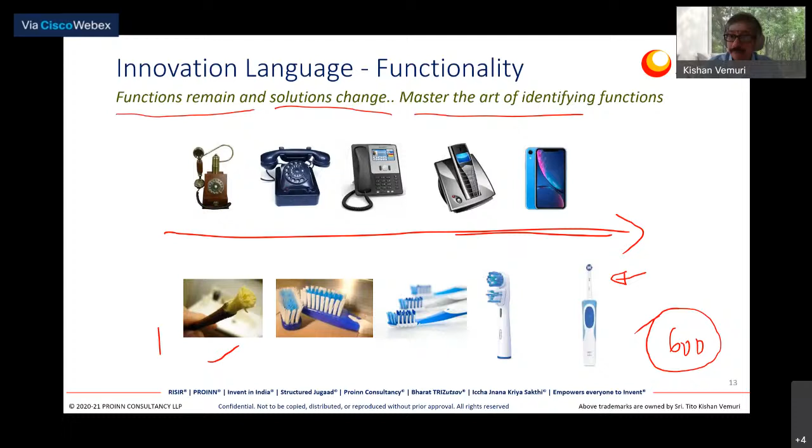The intellectual property resides in the solution. So if you're talking about mastering the art of innovation, one of the very fundamental things one has to understand and master is mastering the art of understanding functionality. So anything I talk about further, even in the case study, I'll be showcasing how that functionality becomes a paramount understanding, and the method that brings a solid framework to do that.

So the main parameter of value is what people are willing to pay for, and that's why they're trying to differentiate. It's well understood in the market, and people would like to have that as a solution. Now, that's where there's still a gap of unsatisfaction. But there's a parameter of value which is already known. For example, if I'm talking about automobile, the safety of automobile is always an important requirement. People purchase

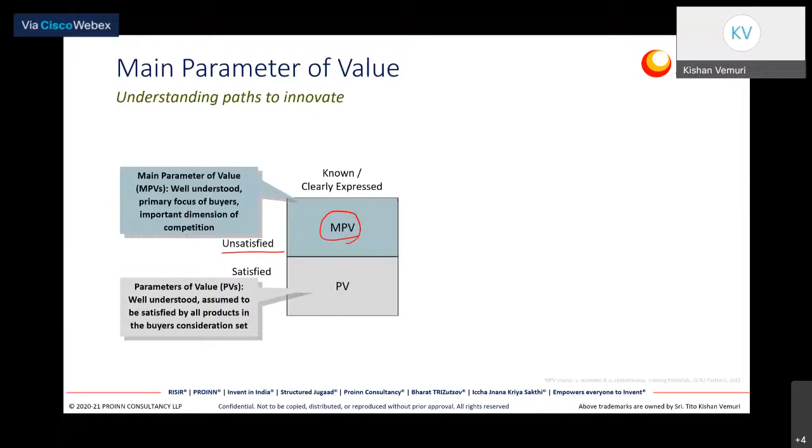with that understood, and it's been addressed. The other aspect is you get to the tacit part, which is basically talking about, in the context of the automobile, it's all about driving, it's all about a person's ability to do. And what is very critical is what is not expressed, and that we call the latent parameter of value, and it's still unsatisfied.

So if you look at automobile as an engineering system, people know safety is a main parameter of value. There are ABS, seat belt, and airbags pretty much there. What we are talking about is every time what people look at is all in a reactive mode, and all these approaches are reactive. Can we go to a proactive method? That is something to look at. Many times people look within the car, but can you go beyond the car? Can we provide solutions beyond the car? So that which is not expressed and not satisfied yet is where an MPV is, and if we can address that, it gives a significant outcome in the entire evolution.

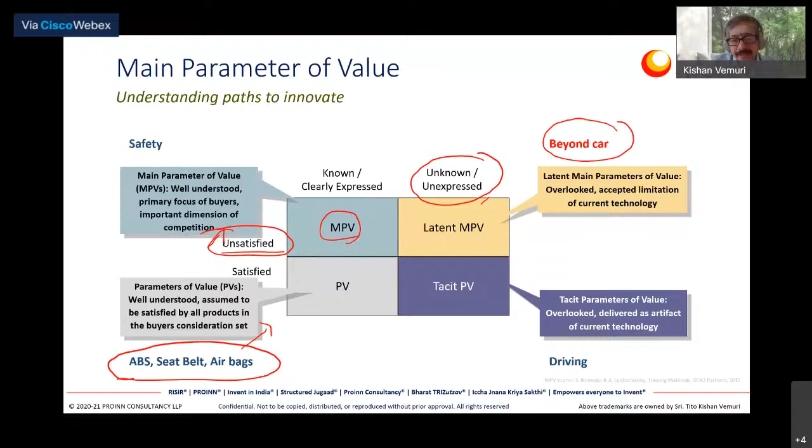To address this MPV, I would bring a very interesting, important corollary on how to look at an MPV in its evolution. One of the very important aspects people talk about in B-school is the curve called the S-curve. The S-curve originated fundamentally from nature, from bacteria, where colonies of bacteria start small, grow rapidly, mature at a point in time, and then die down. And that is true for every OEM.

Every product that someone brings into the market has a point of starting and a point of life ending. Now, when you look at this entire life cycle and put that in the context of innovations and inventions, your level of inventions would be very high at this early level. Then, as the system evolves, the quality of inventions comes down, and there are a lot more incremental innovations happening.

But what's critical here is a parameter of interest: the ratio. That ratio is the ratio of functionality, the value we're trying to provide, over the cost. What's interesting is this ratio changes at each phase of evolution.

At the initial phase, the value is very high. That's the reason someone tries to bring a product out. Once the product comes into the market and people adapt it, they're willing to put more functional value into it and pay more money for it. You would never see a product sold that has inferior value compared to what it had in the past.

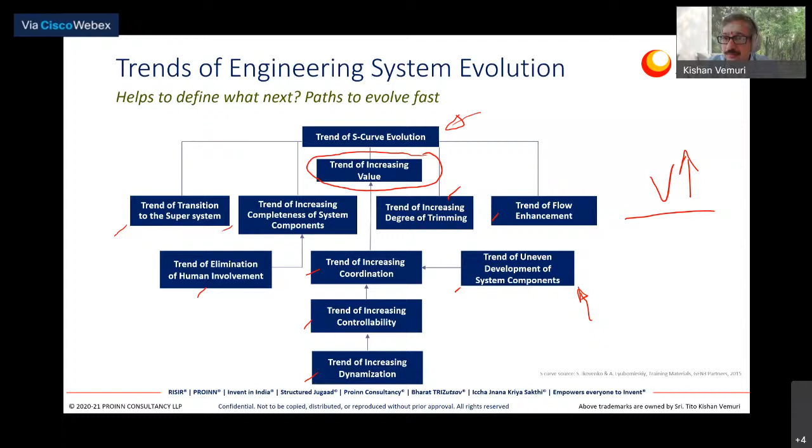So the mother of all trends comes from the S curve, and critically, the main trend is all about increasing value, the numerator, the functionality. That functionality can be enhanced by looking into multiple trends, and these trends can help us talk about what the next evolution could be. If you're developing intellectual property or strong novel products, digital or physical, it's critical to understand the evolution of trends. We can formulate problems by looking at the trends and arrive at solutions much faster. These are all practical, novel solutions found in the field.

To give context to this particular trend, I'll take one interesting example: the trend of increasing system completeness. Take any product, and there are four important aspects: an operating agent, a transmission, an energy source, and a control system. For example, I'm using a Microsoft pen. The agent is the ink at the tip. There's a mechanism that holds everything together, a battery as the energy source, and a control system, which at this point of time is me.

If you look at a particular product and its evolution, let's take for example a pen, the marker. The operating agent is the ink.

Now, if you look at the evolution of the product, the transmission is being added to the operating agent, and you got a product called marker. Now, the next level, and this is the best level. From the last 25 years, since I did my master's, I've not seen any significant innovations in your marker.

Now you got this pen, which is about 9,900 rupees. This is about just 25 or 30 rupees, for example. Now, what you can do, you can talk about the energy source. It has an energy source, but still it doesn't have control. I still need to exercise my control, and it doesn't have the full energy.

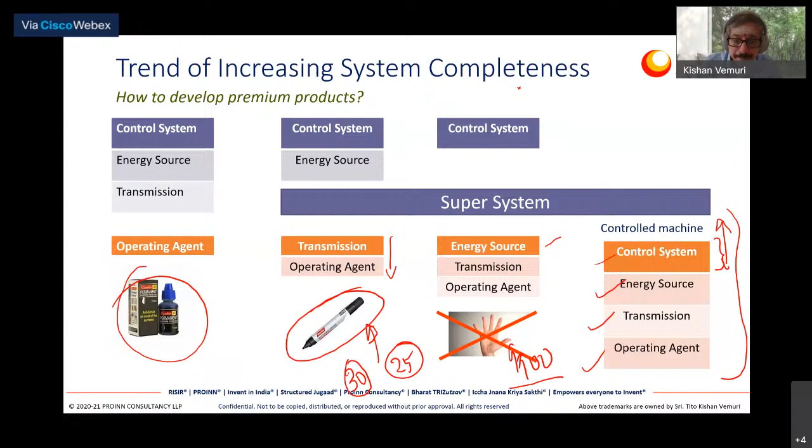So in the context of where we are in a pandemic, obviously I'm sure everyone lived the last 18 months with masks. Since I'm at home, I'm not using my mask, but absolutely I would wear a mask. But look at this mask. To put the context of how we can come up with novel solutions without much difficulty is what I'm talking about. What is very unique of this approach is we can model problems in quite unique ways.

Look at this. If I were to use an N95 mask, I can shield the virus. But the problem is the amount of oxygen intake or air intake comes down, or people can't see your smile. So there is an element of benefit and an element of penalty. One of the very critical understandings of this entire approach and inventive thinking is one which has two conflicting requirements - there is a benefit and there is a penalty.

The win-lose solutions are those which actually give benefit, but they still live with penalty. For example, we are talking about BS6 migration. BS6 is a significant evolution. Now, if you look at the benefit, the entire emissions have come down, but the penalty is it's very expensive - everyone has to increase their prices and everyone has to pay more money for it.

So can we bring a solution with less penalty? It's a win-win. That is what this approach of problem solving is all about. And how I can do that, I'm going to show you that. There are about 5 methods, a very unique way we can model it.

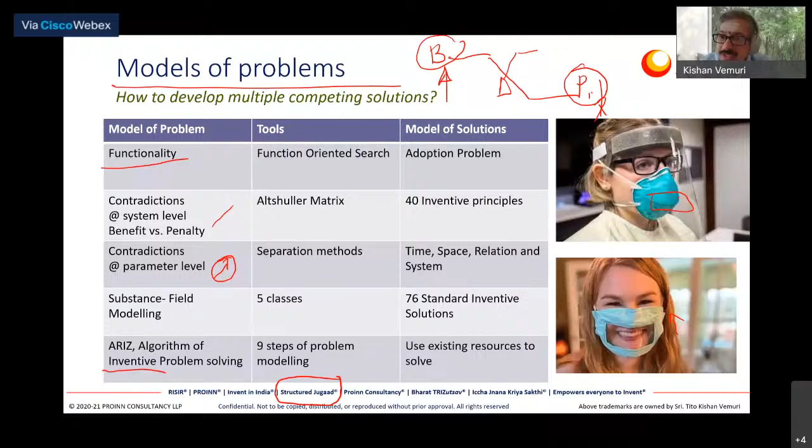So just to put that in context of this problem solving approach - from working in the aviation domain and mechanical domain for long, if you talk about aircraft engines, one very important thing is weight matters. So the entire goal is to reduce weight.

So what I can do is take an action - I can make the blade hollow. By doing so, I can reduce the weight. But the problem is the strength of the blade can be compromised.

As I said, someone has already solved our problem. The traditional approach is to try to jump onto a solution, but someone has already solved this problem. So what you need is an algorithm that gives you the answer. Everything we bring has a very strong algorithm of proven methods that can be used.

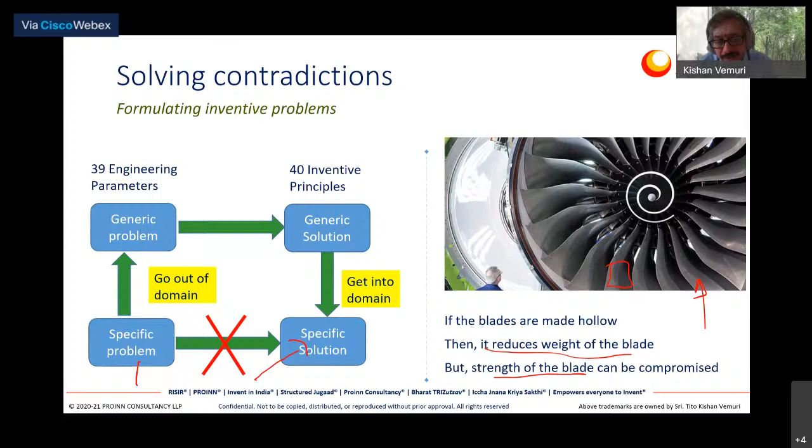So we have parameters - the 39 engineering parameters, which have conflicting requirements. As I said, there's a benefit and a penalty - one of them could be a benefit, one could be a penalty. And very interestingly, after Altshuller went through close to 20,000 patents in the 1950s, he found that there are only 40 inventive principles. That's it.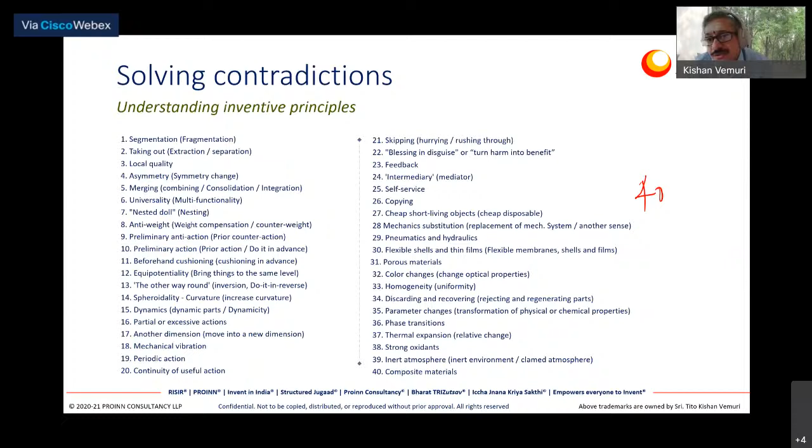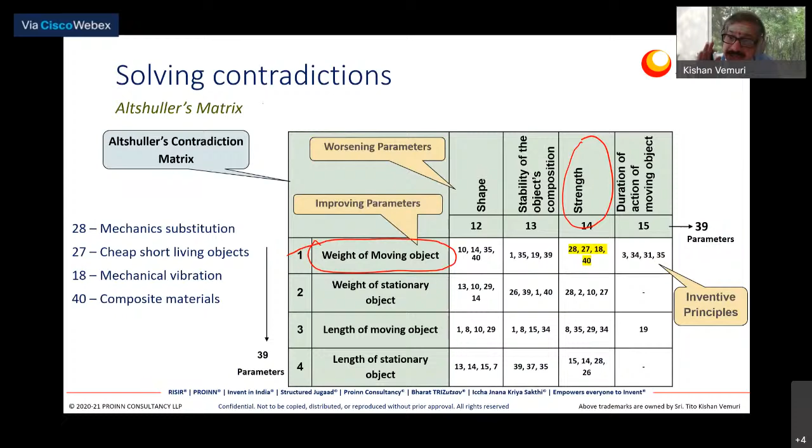If you can adapt the principles - and this is the matrix I talked about - what I'm trying to do is reduce the weight of the moving object, the blade, by making it hollow, but strength is a penalty. So it gives me a set of principles. I would actually use these principles as guides to ideate, and I do a brainstorming session.

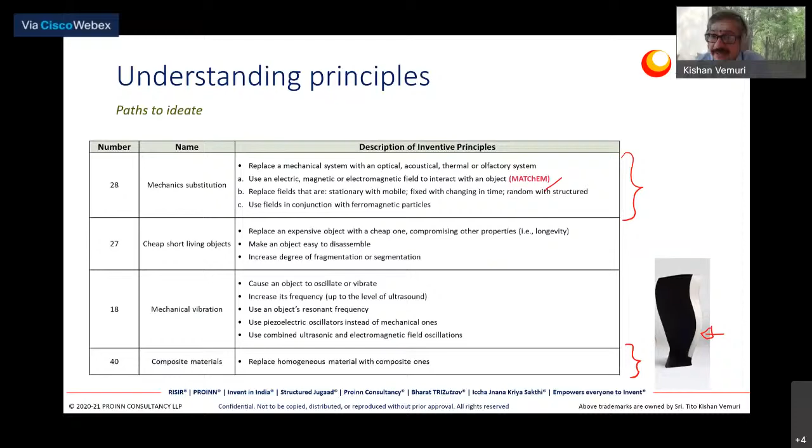One principle says I can use substitute fields. I can replace the mechanical link at this point in time, I can get to an electromagnetic field, I can use composite materials. If you look at one of the best known solutions out there, it's a composite blade, which shows how you can have a blade of low weight with the most powerful reliability.

So we use this approach even for software patents. If you look at this software patent, which has been granted - if you're talking about a file in the context of the pandemic, encryption security is very important. If the file is encrypted, you can make sure unauthorized access is not given. But the problem is if the file size is too big, it takes a little longer time.

So what you do is take a specific problem, make it a generic problem, find a generic solution, and ideate from there. It's quite interesting - it says I use dynamization and segmentation. So if I look at the entire file, I can segment it into context of data, images, tables or text.

What I can do is dynamize - dynamization means having more than one. Instead of using one algorithm, I can use multiple algorithms. And a solution is provided in that. So what TRIZ gives you is the direction of the solution - it doesn't tell you how to code, and it doesn't tell you how to engineer. The engineering and coding is taken for granted. What we're talking about is developing solutions to problems.

So I'd like to talk about innovation strategies here, and then go quickly to the case study. As I said, the concept of benefits or penalties is what we call ideality. Primarily we use this approach for multiple things - whether you're talking about an incremental solution, a sustaining solution,

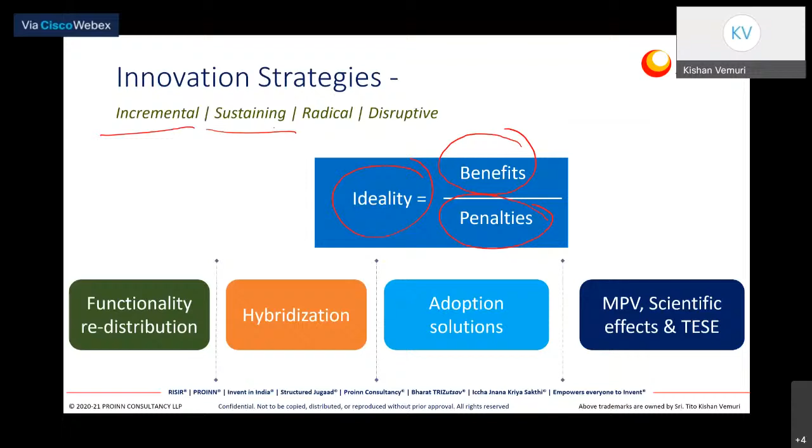or disruptive solutions, very quickly.

Mr. Tito, yes, just excuse me - I would request you to switch off your video because at times your network is breaking. Oh, okay sure, thank you. It will be smoother. Oh, thank you. Yeah, is this better, Namita?

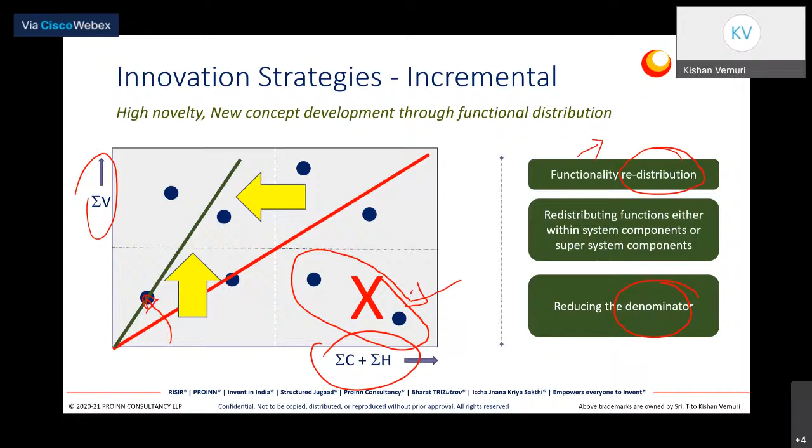So if people are looking at incremental innovation, we can reduce the denominator and increase the numerator. The numerator is always there - if you look at a mobile phone, people are paying one lakh rupees because they're getting a lot more in the numerator. And we have a very powerful method called hybridization, where we talk about adding things and developing composites by solving new problems.

And when we have radical innovation - the skin color is very highly biased around the world. So if you're talking about color change, people are not talking about permanent change. They want it contextually, they want a light skin, that's it. So we have a very powerful tool called function-oriented search, where we generalize the functionality.

Then we look at industries, and one of the industries we look at is nature. We can look at, for example, the polar bear. Interestingly, the skin color of the polar bear is charcoal black, and the fur that it has is not white, it is translucent. So when you have a translucent material applied on a dark substrate, you see a light skin, and that's what you see in most advertisements. Many cream companies basically use that.

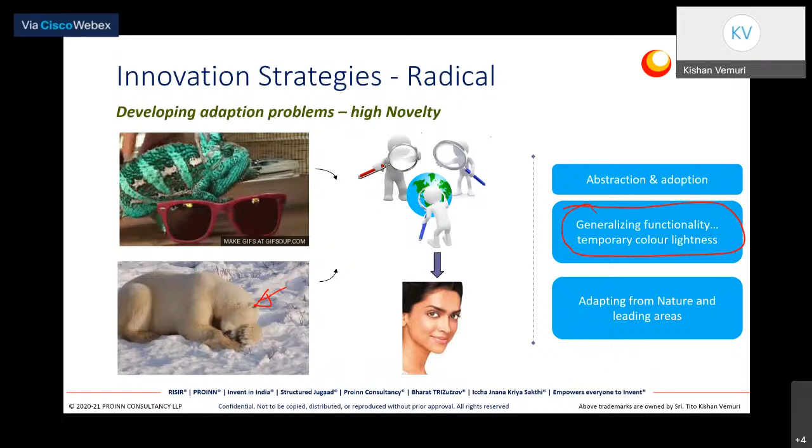And if people can go one step further, they want to see how they can change colors - they can look at a chameleon and talk about what they can leverage. And finally, when we are talking about disruptive solutions, that's where we are in this present world.

What is very important here is we have tools - we actually generalize. If I take, for example, petrol, the cost of petrol is very, very high in India. One of the reasons for that is the method they use is called catalysis, which needs high temperature as a requirement for the catalyst to work. What they're doing is basically trying to break the hydrocarbons. So if we generalize hydrocarbons, it's basically making and breaking bonds.

And if we can look at the scientific effects, there's a very interesting thing - I can look at radiation cracking, which can be done at room temperature. That's a very high level of invention where you can develop a totally new product altogether.

So summing up these things into the context of an example of emissions - if you look at BS6, from 2000 till 2020, in the last 20 years there have been significant evolutions in the automobile industry where we are talking about reducing the NOx. This is a very interesting slide.

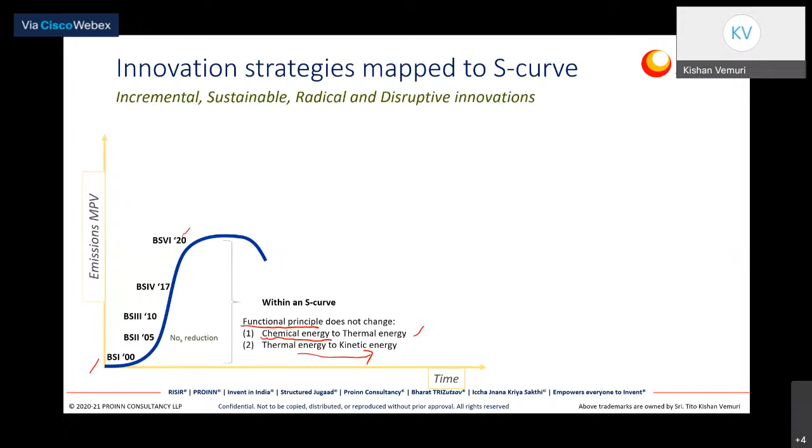If you look at it, what they're trying to do - the functional principle, as I just explained in disruptive innovation - is all about using a chemical, which is nothing but your hydrocarbons, and you get thermal energy, and the thermal energy is converted to kinetic energy. So within an S-curve, the solutions you talk about, particularly from BS4 to BS6, are the significant things that have been adapted.

There's an adaptation that they brought directly from SCR, from the aviation and energy industry if you look at it, and the diesel particulate filter. So this is basically adaptations taken from other industries, and everyone is trying to enhance it.

So obviously the emissions are reducing, which means your value is high. Now that people have released their products for BS6, what they're working on is basically trying to reduce the cost - that's incremental innovation. So this is a method you can use as a way of looking at how people talk about solutions within an S-curve.

But if you're talking about the disruptive world, we know that EV is taking a significant portion of the traditional IC engines. What's happening there is nothing but a source, the functional principle has changed, where it has changed at the energy level. Remember I talked about the operating agent, the transmission, the energy source, and the control system. So the energy source, instead of chemical energy driven to thermal to kinetic, it is basically electrical energy to kinetic energy. So when we talk about a shift in the S-curve, the only thing you can talk about coming from is the change in the functional principle and the main parameter value, looking from the trends of engineering system evolution.

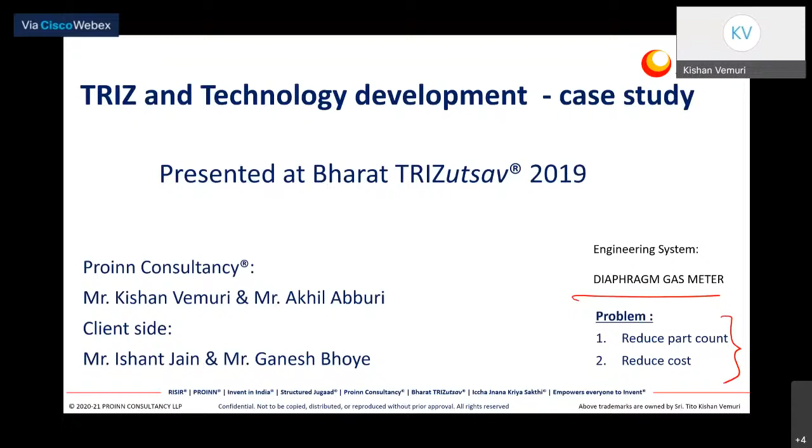So when we talk about the product and cost, the solution is that people essentially need differentiated solutions - products with less cost and more effectiveness. So very importantly, whenever we work on innovation strategies, we first look at understanding the main parameter of value. Looking at this particular product, which has been in the market for 30 years, there are very clear recommendations that this method gives us.

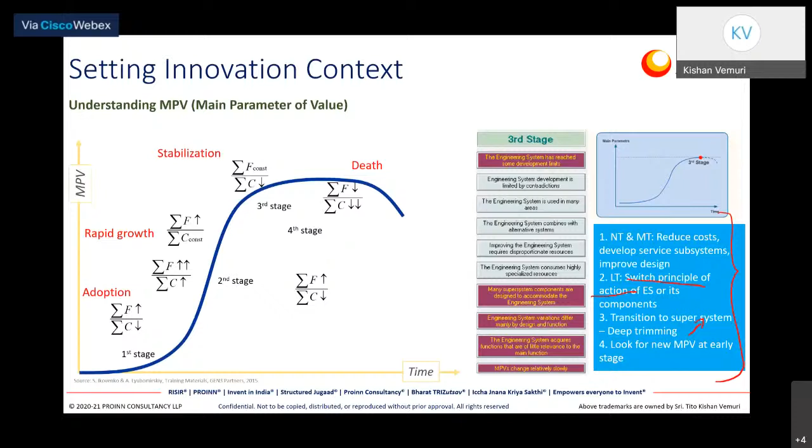It says you can talk about the near term and midterm. You can reduce costs, you can trim the product, you can switch the principle of operation - that's the functional principle change - or you can actually look into a new main parameter of value.

So as I started, it's very critical that any product we understand should be understood in the context of functionality. So what is this gas meter? It's a diaphragm-based gas meter. There's a diaphragm, so the gas moves the diaphragm, and then there's an outer diaphragm plate, an inner diaphragm plate, and a flag, and a gasket which stops the gas.

Now looking at the full picture on top, there's a manifold grid and a hub assembly. What's interesting is the manifold grid guides the side pillar, which moves the cam slider. The cam slider rotates the cam, and the cam rotates the cam pillar, which rotates the crank, which rotates the gear, which rotates the meter. But what this product is meant for is to measure gas and disperse gas.

That's it. Now when we are talking about that particular one, and when I look at functionality, I see that multiple times the functions are being repeated, which means the system by itself has a significant opportunity to innovate. So when you look at these things, what we bring from TRIZ methodology is we formulate problems. We formulate very unique problems. So if I were to look at the complete functional modeling, it looks like something like this.

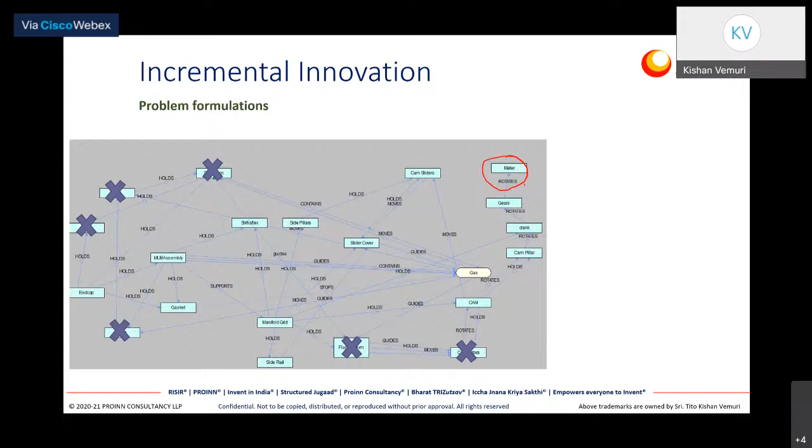If I'm talking about incremental innovation, our entire intent is to make sure the gears rotate the meter so that people can't tamper with the machine at any given point of time. So the formulation of the point is: if I can devise a method where the cam rotates by itself, then I can eliminate these product components that are in the system. That's the benefit I get. But there's a penalty. We want to make sure the measurement of the gas flow should not worsen at any point of time.

One of the recommendations that you see from this method in stage 3 is deep trimming. So if we can trim it much deeper—if we can rotate the crank by itself—then I can eliminate a good chunk of parts essentially. That is deep trimming. And deep trimming, trust me, gives you very novel solutions which are not there, and it gives us very strong intellectual property altogether.

So we're talking about this particular product here. We looked at this Scotch yoke mechanism as a means of reducing the number of parts. Then when we looked at the problem formulation of the functional principle, we talked about how you can use the Mobius band as a method, where you just have the shaft and the Mobius band, and that can essentially do that. Once we do this, we go to the next step in understanding the intellectual property.

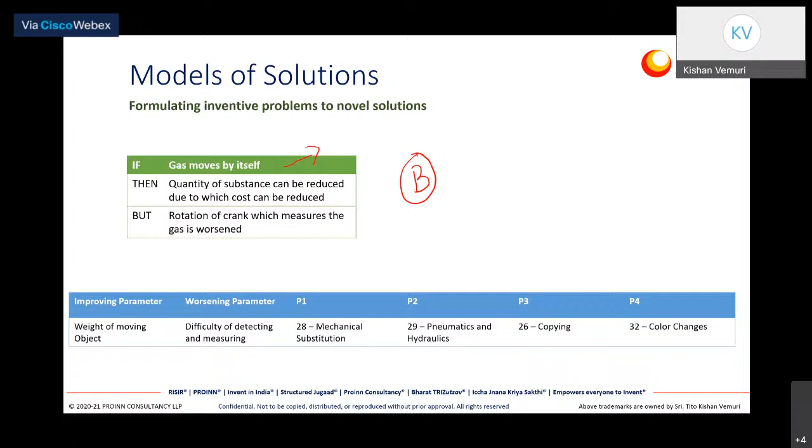You look at the IP out there. So when we formulate the problem, if the gas moves by itself, that's an action. Then the benefit is the quantity of substance—we can move the gas, we can eliminate a lot of parts. That's one of the intents of this particular context of the problem. But what is the penalty? The measurement can be a potential penalty that comes in.

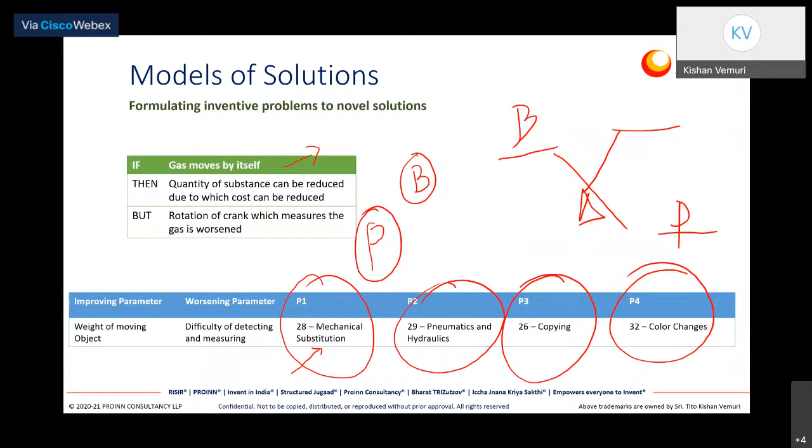So when I formulate an inventive problem, we call it an inventive problem—one which has a benefit and a penalty. Now we're talking about a win-win solution. It gives us a clear direction. The methodology guides the path, and it says that in different domains, for this particular conflicting requirement, a mechanical substitution is used.

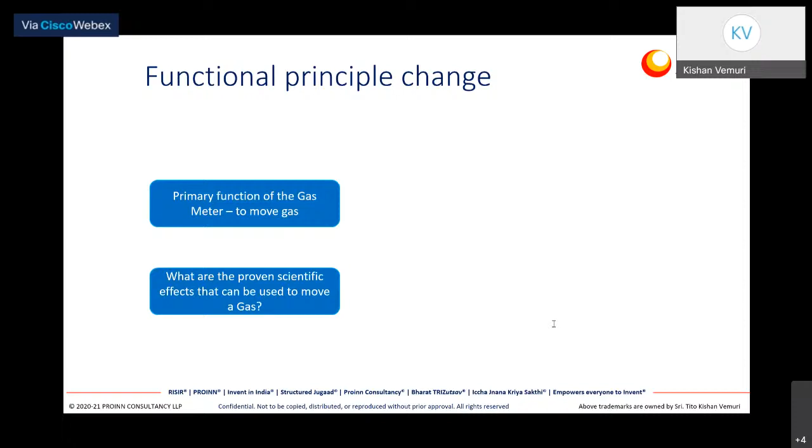And that's how we could develop solutions for the product for the client, where multiple intellectual properties were being generated. That's where we completed the methodology of TRIZ, where we could develop for the client. So just to put that in context, we have multiple solutions that have been brought in as patentable solutions.

I just completed the case study and have just a few more slides to talk about. Since we are talking about innovation, and fundamentally about building a culture of innovation across the country and organizations, there are a few organizations which are good, but they're only pockets of excellence. What we need is not pockets. A culture is something that is done and demonstrated consistently over a long period of time.

What I've seen is there are two important aspects that really break the chain of building a system of innovation culture. One aspect is people—they don't question status quo, so nothing is going to change. What we need to impart is how to question the status quo, and that comes with changing mindsets. And that comes with a very important learning of how you accelerate change in the corporation.

What people use are win-lose solutions. Look at BS6, it's a very great solution. We have a lot of benefit that comes from the environmental reduction of emissions, but it's very expensive. It drains the pockets. So you need to go with win-win practical novel solutions, and that comes only by problem solving. So the entire approach is about problem solving, and that's what we use as TRIZ, as a methodology, and structured jugaad.